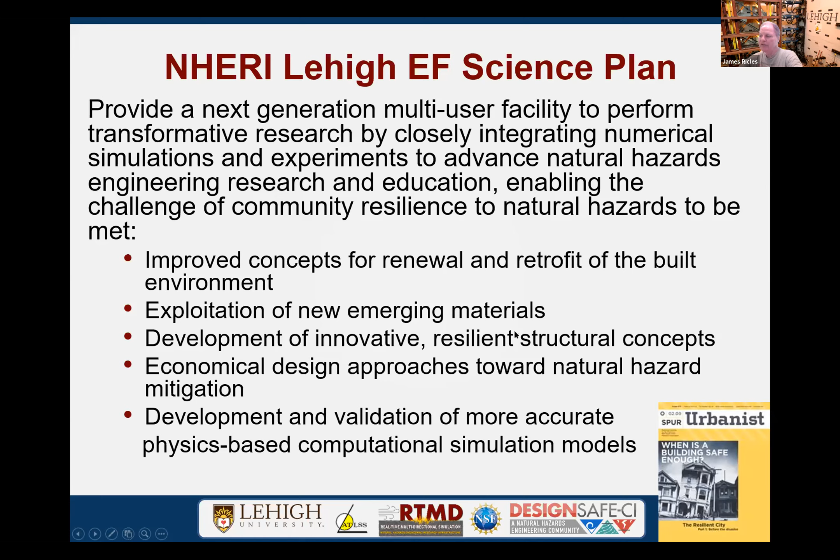This involves a couple of aspects: improved concepts for renewal and retrofit of the built environment, that is resiliency, exploitation of new emerging materials, the development of innovative, resilient structural concepts, economical design approaches towards natural hazard mitigation, and the development and validation of more accurate physics-based computational simulation models.

Our focus is on large-scale, multi-directional, real-time hybrid simulations. As you'll see later, that's not the only thing we do, but we'll elaborate on that. In this type of simulation, you combine physical and computer-based simulations. An experiment is actually a simulation, it's just a physical phenomenon, but we combine that with the computer-based approach for evaluating the performance of large-scale components and systems as a whole.

We want to be sure this doesn't appear overwhelming, because real-time hybrid simulation on paper looks not too difficult, but when you get into the details and theory, it could be a little overwhelming. What we do is provide user-friendly tools that enable you as a researcher to readily utilize advanced methodologies we've developed, using advanced testing technology and algorithms to perform complex experiments. We'll show some examples of that as we proceed through the presentation today.

So what we're able to do is enable researchers such as yourself to readily perform 3D real-time hybrid simulations, RTHS, of large, complex, nonlinear systems subjected to multi-natural hazards, for example wind and earthquake, using analytical substructures created with robust computational models.

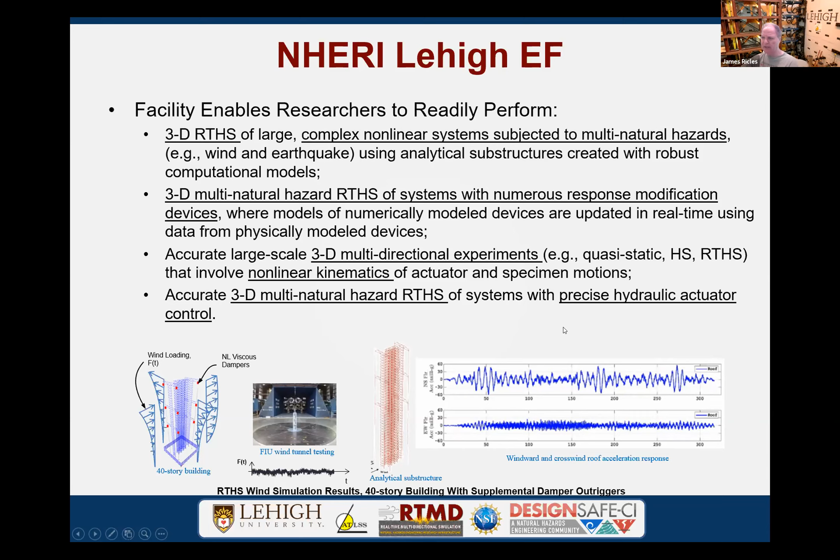Accurate large-scale 3D multi-directional experiments involve nonlinearities between actuator motion and specimen motion, which could occur in quasi-static hybrid simulation (HS) or real-time hybrid simulation (RTHS), both involving nonlinear kinematics with the actuator and specimen. In doing so, you need accurate actuator control. We have the ability to do that with some of the algorithms we've developed, enabling you as a researcher to utilize them in 3D simulations.

Some key questions in natural hazard mitigation. These are ones that have been posed by the National Science Foundation, the NHERI Science Plan. Some of these, which can be addressed through research performed at our facility, will lead to the development and implementation into practice of new natural hazard mitigation strategies and innovative resilient structural systems. In other words, the research you perform will transform and translate into practice. That's one of the ultimate goals.

In addition, enhance understanding of response to multi-natural hazards by accounting for soil structure interaction and fluid structure interaction effects. We actually look at considering both. Then the comprehension of system level effects on structural and non-structural components through large-scale 3D system experiments—not just one isolated component, but indeed the whole system in 3D.

Acquiring high-quality data, again, leads to improved computational models for predicting the response, not just of a system, but perhaps a lot of the infrastructure of the community to natural hazards. And what's very important there is training the next generation of workforce—the students who will become the leaders of tomorrow in natural hazards engineering.

What are some example projects? We have a number of them. These are just some that could be enabled. Some of these don't exist yet, but could be enabled at our facility.

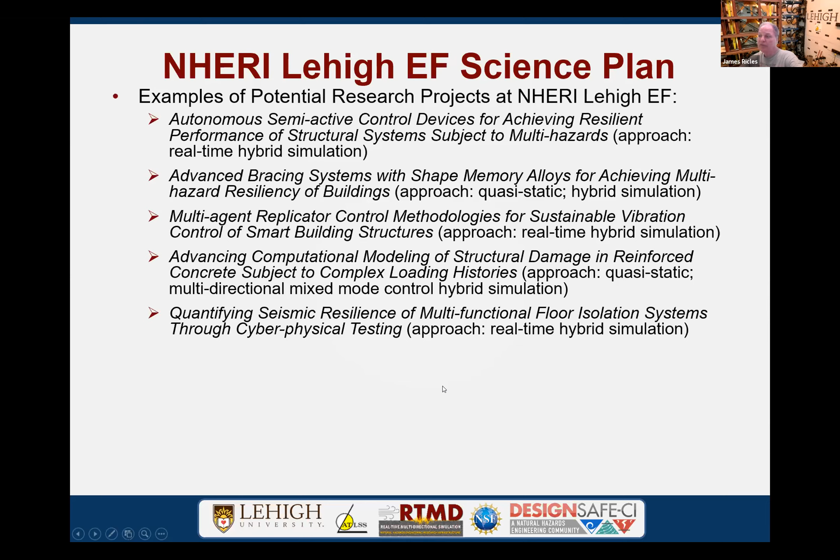Quantifying seismic resiliency of multi-functional floor isolation systems through cyber-physical testing, hybrid simulation—in this case real-time because it's probably rate dependent. And performance of non-structural components, very important as part of the issue of community resiliency.

These components are in systems, and we want to minimize the multi-hazard losses of these. And the effects of soil structure foundation interaction and multi-hazard forms of tall buildings, supplemental damper outrigger systems. The last one I have here is semi-active controlled cladding panels for multi-hazard resilient buildings.

In the parentheses, I didn't name each of the methods, but those are some perhaps conceived methods that could be pursued.

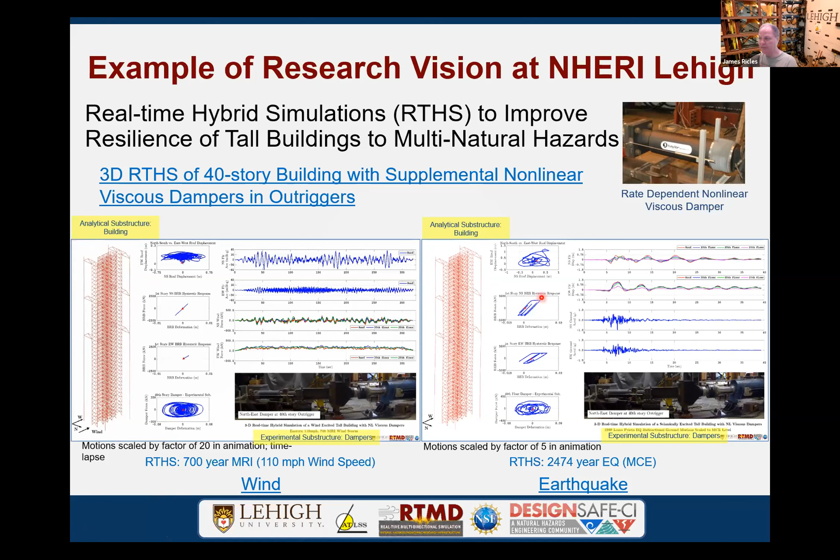When the system is subjected to wind, it's predominantly linear, but it has high acceleration, so dampers are placed in to minimize that. At the same time, on the right-hand side, when the earthquake occurs, there's actually nonlinear response in the braces that takes place. So this example with nonlinear response is accounted for.

Let me now describe the facility. We're a former NEES site—I think it originated around 2014. We've continued as a NHERI site. We were looking primarily at earthquakes, and now we address natural multiple hazards in general as a NHERI site.

We're unique in that we have a portfolio of equipment, instrumentation, and infrastructure, in addition to test beds with simulation protocols that enable us to do large-scale multi-directional testing. We could conduct concurrent multiple large-scale experiments, not just one, because of the size of the laboratory. We have an experienced staff that's very important.

Our facility exists within what's called the ATLSS Center. The ATLSS Center has been at Lehigh since 1987. It was sponsored by NSF. It continues to thrive, giving us additional resources and infrastructure to work within. Also, NHERI—our facility and ATLSS—complement each other.

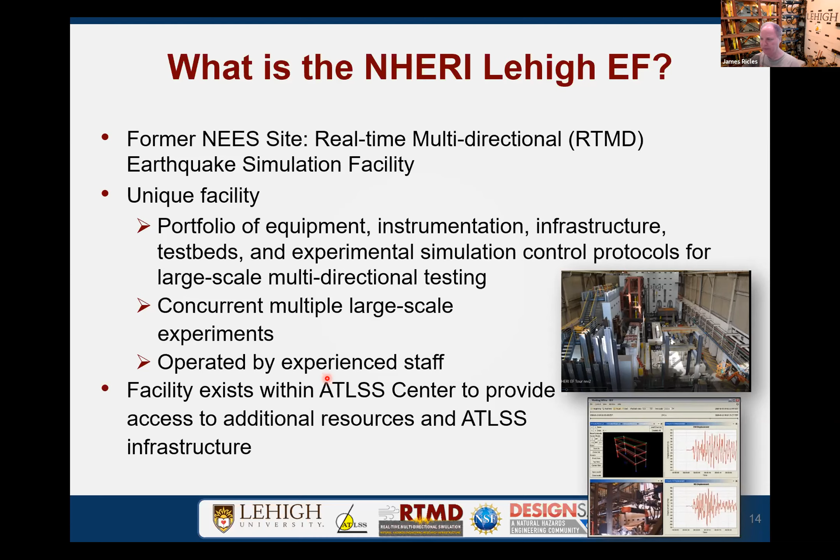What are our strengths? I mentioned this a few times: large-scale multi-directional testing, real-time loading. We have the actuators and hydraulic power to do so. We also have the ability to control those actuators, including adaptive compensation. That's very important in hybrid simulation because you can't really pre-tune things well, given that not only the actuators go nonlinear—the hydraulics—but also the specimen, and that could change your control parameters if you try to fix those otherwise.

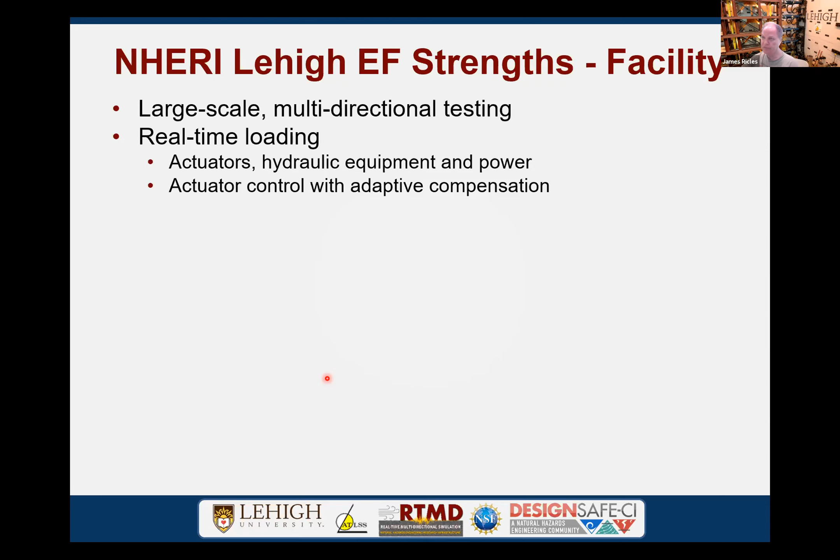We've built hybrid simulation from the ground up. We didn't borrow something and try to run it—basically that doesn't lend itself to what we'd like to accomplish. So we've implemented integration algorithms, formulated those initially, developed analytical models, multi-grid parallel processing type approaches, actuator control, multi-directional real-time actuator control in addition to kinematics, online model updating, and a data model for large-scale test data.

Our facility includes conventional instrumentation, but also advanced instrumentation such as digital image correlation and laser transducers, examples of which you'll see later. We also have a large inventory of ATLSS testing and auxiliary equipment beyond what we have for NHERI, which allows us to complement and have some contingency and redundancy.

Now, the people are very important. Our team includes expertise in several areas, including structural, earthquake, geotech, aeroelasticity, and wind engineering, as well as hydrodynamics, fluid structure interaction, probabilistic-based modeling, and structural monitoring and damage assessment.

We're pioneers in real-time hybrid simulation. We have a good know-how in large-scale experiments. On paper it's one thing, but to have done it successfully and have the experience that lends itself to helping researchers is very important. That's the know-how. We have a strong relationship with industry, practicing engineers, and familiarity with codes and standards. Myself, I'm a registered practicing professional engineer, so I'm very familiar with the practice and the field.

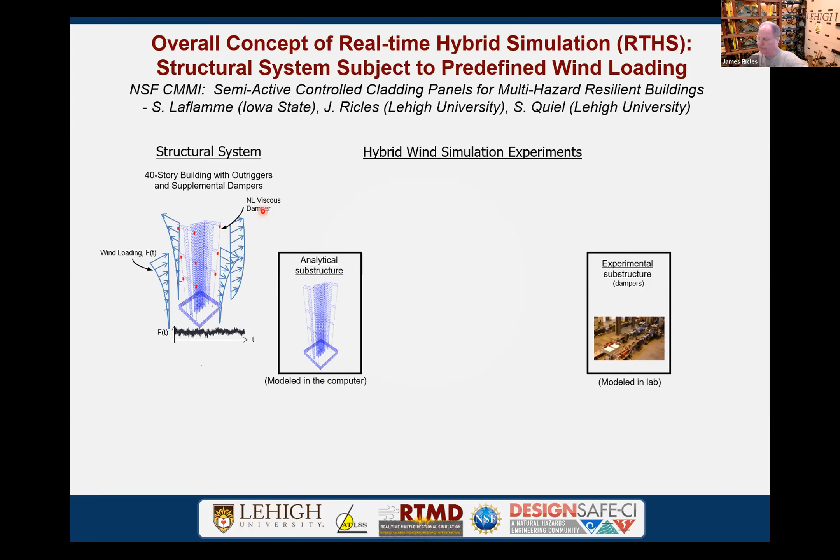You may argue there are simple, very easy models, nonlinear Maxwell models as an example. I would argue no, because these dampers perform differently under earthquake or wind, and being large scale, there are some issues you may be surprised about. So this is a simulation coordinator, it integrates the equations of motion. This is numerical integration, where the integration algorithm is very, very important. Leanne will discuss later - you have the inertia, proportional acceleration, velocity, which relates to the inherent damping.

R sub A is the restoring force from the left-hand side analytical substructure. R sub E is from the experimental substructure, the restoring force. That all balances the applied load.

At a particular point in time, we take the forcing function at that point and put it into the coordinator. The equations are then integrated to produce command displacements to both substructures, which are separated out as shown. What we ask in return is to have those come back.

This needs to be done in real time, for example in less than 0.002 seconds. We've actually done simulations where this takes place in less than 0.001 seconds, so 1 times 10 to the minus 3 as a time step. That all has to be completed within that time frame.

If you're able to do that, you then move to the next time step. If you can't, the experiment will go berserk because you'd be creating energy, which is literally impossible, but the system will try to do that and basically diverge and become unstable.

So if you go through that whole process and finish the experiment, you've got a real-time structural response. If you slow down the rate of testing, and that's fine as long as the right-hand side experimental substructure is not rate dependent, you'd have basically a more conventional hybrid simulation.

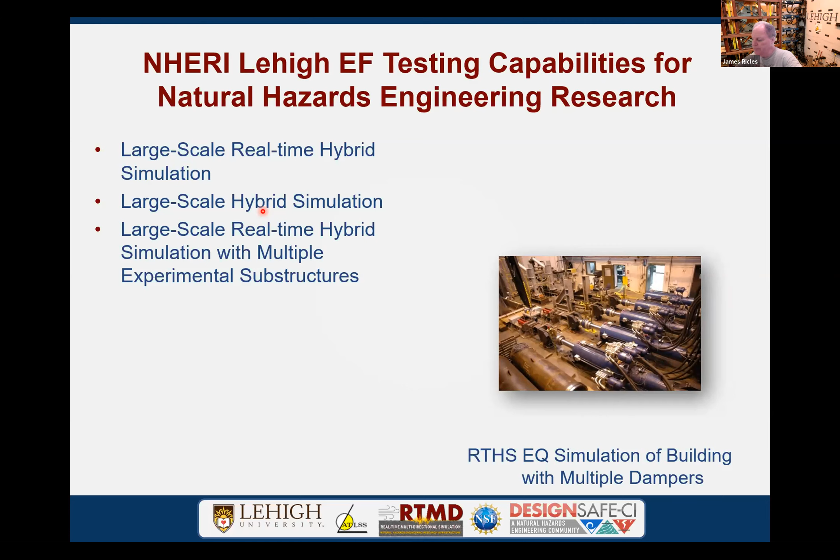We could also distribute the simulation. It's called geographically distributed. We've done this internationally as well as locally, for example with University of Illinois, RPI, was modeling soil in a centrifuge and Lehigh ourselves. The simulation coordinator in this case was at the National Supercomputer facility located at UIUC, University of Illinois, Urbana-Champaign.

We can also do this in real time. We've done so, and I'd like to acknowledge Dr. Kim and Dr. Richard Christenson at University of Connecticut, who we've interacted with and were able to do this.

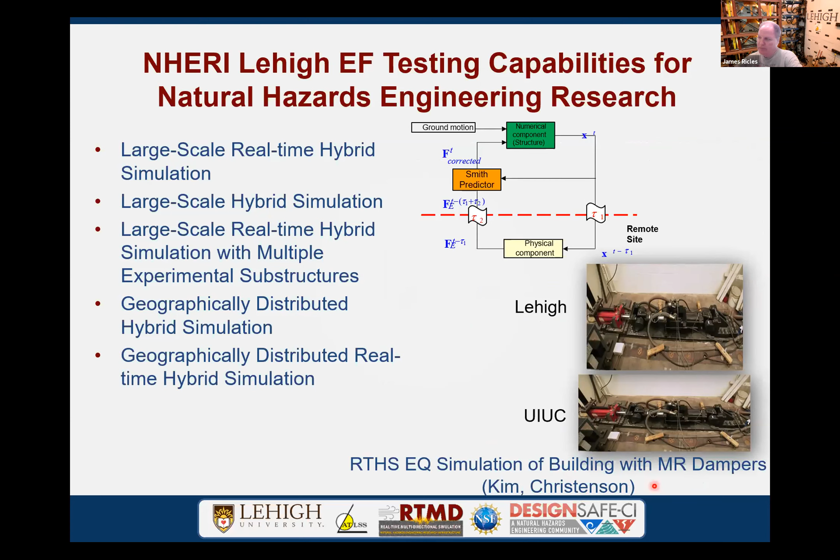Now, we do more than just hybrid simulation, real time or slowed down. We can look at predefined load or displacement. You may be very interested in looking just at quasi-static testing or just characterization.

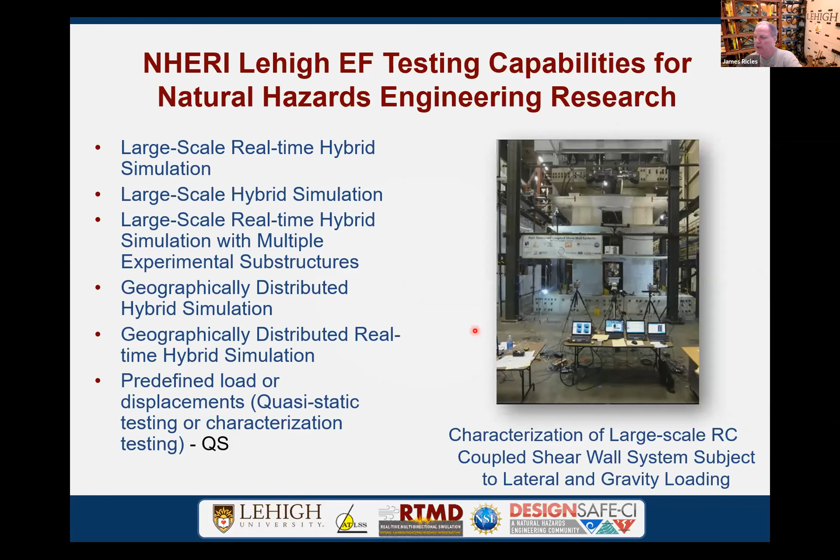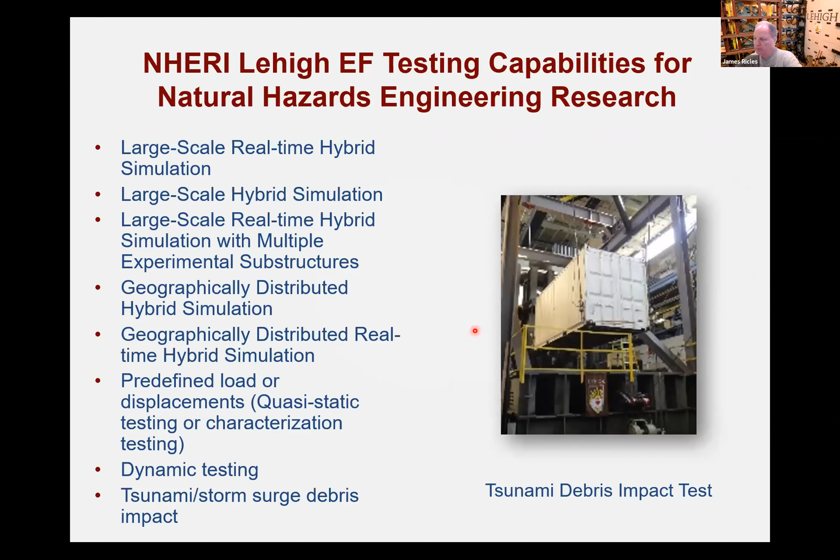The strong floor is 40 by 100 feet. This is in imperial units, so if you want to convert that into metric, you divide it by about 3 roughly.

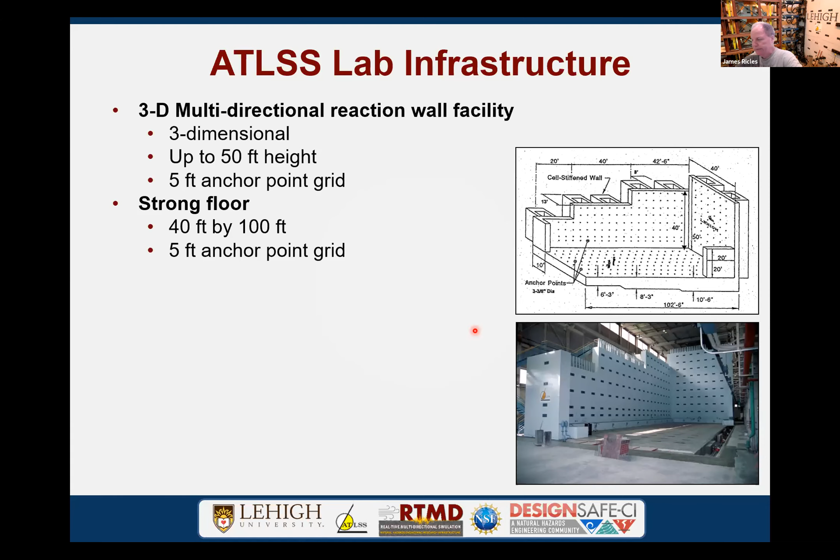We have a hydraulic supply system, additional over 30 hydraulic actuators, and supplementing what we have from our NHERI facility, additional digital controllers, acquisition systems, a large array of conventional sensors including those advanced sensors, and auxiliary equipment, an example being a 40 kip crane that we can use to lift things in place.

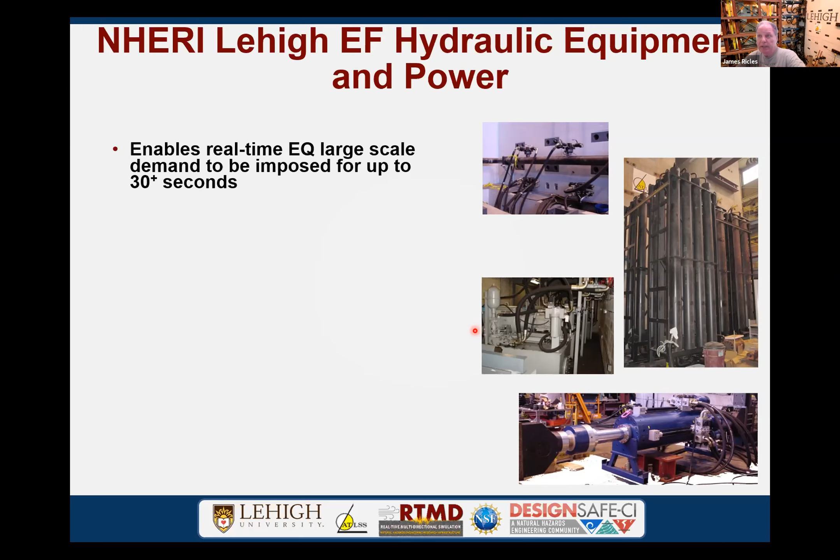Now, what complements that is our NHERI equipment. This was purchased from our sponsor to outfit our lab to do what we're showing you here. What's important at the heart of the matter is the hydraulic equipment and the power. We designed this back in 2002 to enable real-time, large-scale earthquake simulations, with demand imposed for up to 30 seconds or longer. This involves having a hydraulic supply system.

We have 5 120 GPM pumps, an accumulation system to augment that. We can basically supply over 4,000 GPMs, that's gallons per minute. We have 5 dynamic actuators. The capacities are in imperial units, 517 and 382 kips. Stroke plus or minus 20 inches. The maximum velocities are 45 inches a second and 33 inches a second.

This was all by design. This is achieved through high flow servo valves that we could rearrange on the actuators shown in the lower right. The blue cylinders are the actuators.

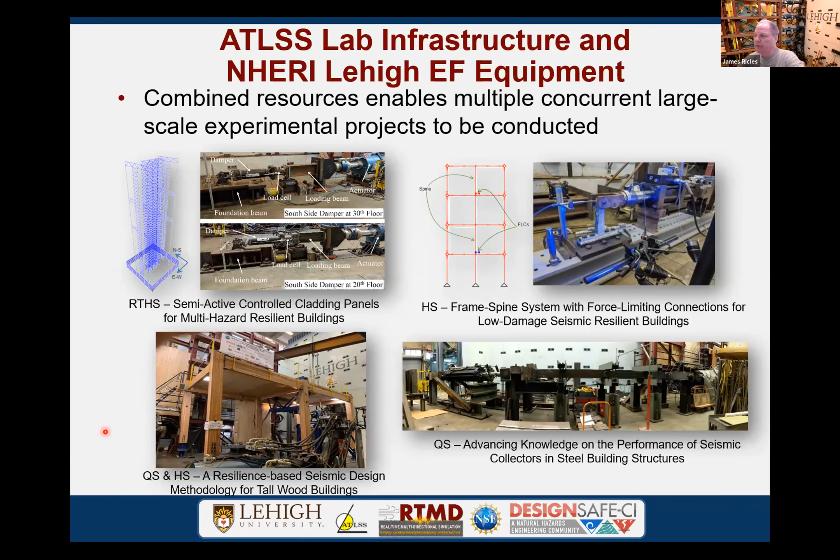Tommy will talk about our integrated control system on the IT side, but what I want to allude to here is it's a real-time system in which we configure the protocols I referred to earlier, shown here. I want to emphasize this: we can run the experiment in real time, or we can slow it down. We call it an expanded time scale.

So you don't want to feel like, well, I'm only going to go to Lehigh if I'm going to do a hybrid simulation in real time. No, if you want to do any type of testing at large scale involving imposed motions, it doesn't matter the rate of loading. It could even be a very, very slow test.

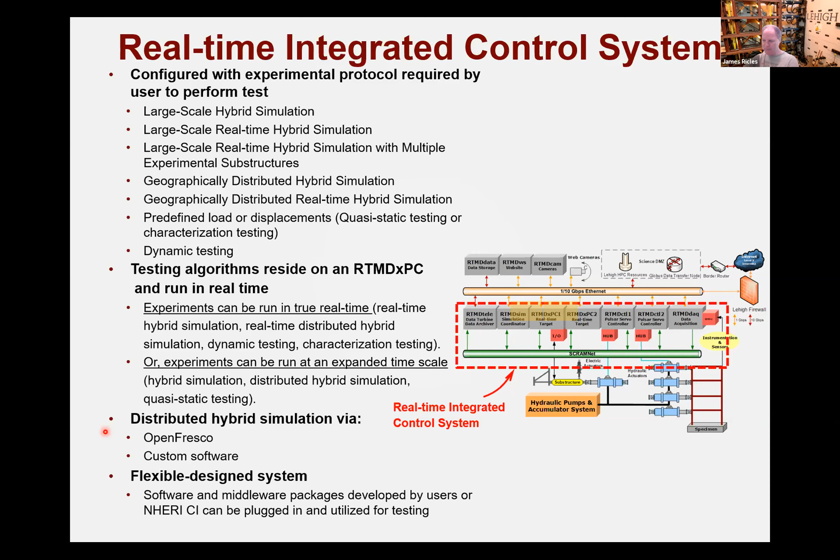We could accommodate you. We can also accommodate distributed hybrid simulation via custom software, or OpenFresco, which was developed at Berkeley. We use both of those pieces of software. We also have a very flexible system where we can use software middleware packages developed by the users or the NHERI cyber infrastructure, an entity in the NHERI community. They can be plugged in and utilized, but we want to be sure they work and have been validated before we integrate them into our system.

Some other resources that exist: we have a large preparation area for constructing specimens. There you can see a braced frame that was fabricated, about to be lifted into the test bed. We do mechanical testing for materials. We have an auditorium for education and community outreach activities. The preparation areas include staging and also a machine shop. The laboratory I showed there is mechanical.

We also have intelligent structures, for health monitoring, welding and joining materials, and microscopy. We have offices for visiting researchers, faculty and staff. And the meeting rooms I alluded to, but also conference rooms, and storage areas. This facility is definitely secure, so you can feel your things will be safe.

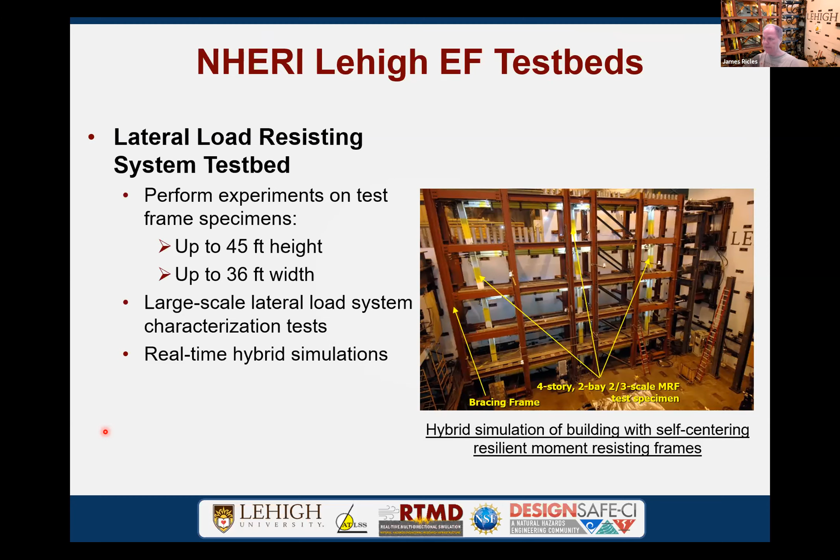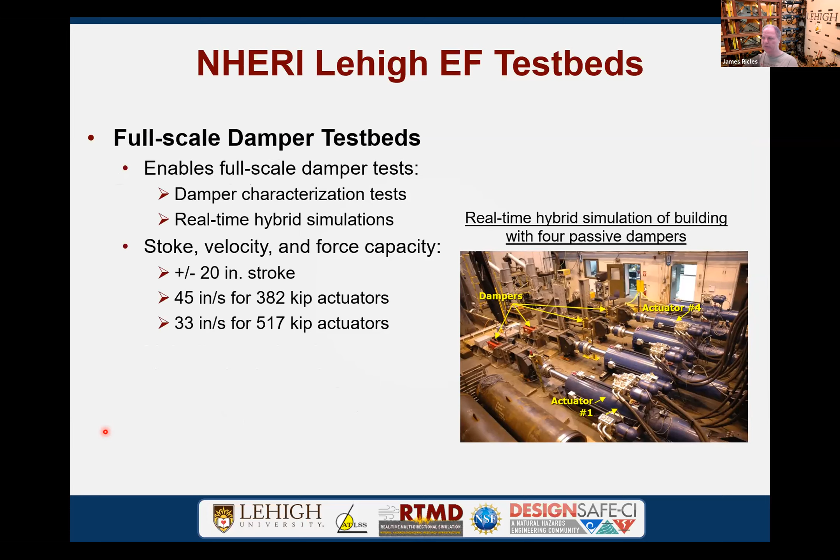The damper test bed, you saw a picture of this earlier. The capacity of those is really based on the actuators, which I'm just repeating here. We've used those test beds for characterization as well as real time. And I should note, these test beds could be reconfigured and positioned at different locations in the laboratory.

The tsunami and storm surge debris flume, I mentioned that. It basically consists of high-speed cameras and a high-speed data acquisition system, very high bandwidth resolution load cells to measure the impact force. And we have accelerometers and laser displacement transducers to achieve that.

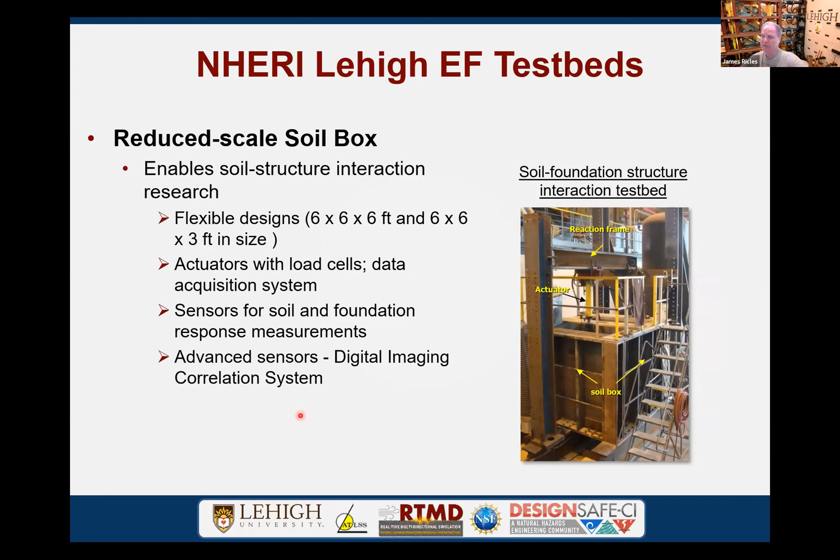The soil box is a reduced size scale soil box. It's very good for pilot tests, enabling one to look at the interaction between the structure and the soil. The dimensions are shown there. It's got advanced sensors as well as conventional sensors, including actuator load cells. The fact that we could also use this to do hybrid simulation or just conventional characterization tests is an attribute.

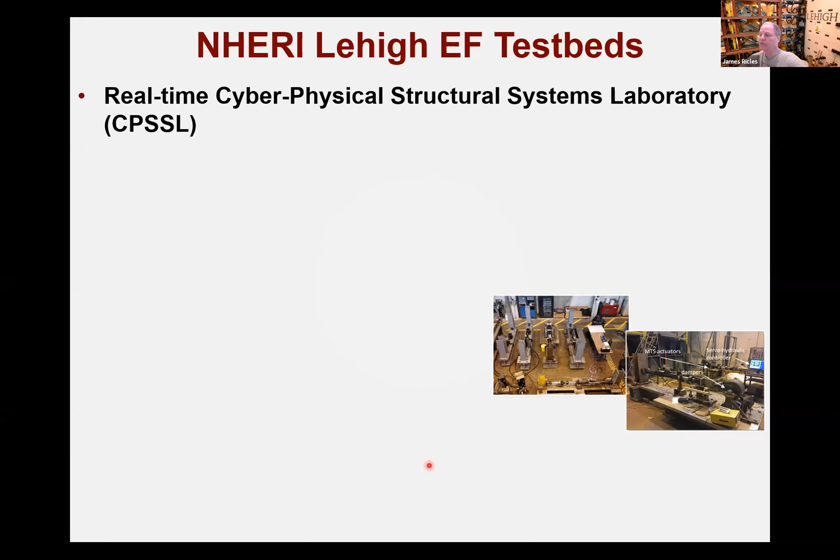It's a new resource, created to enhance our ability to conduct additional research, tie it with ECO activities, and training. Researchers get hands-on experience. If the other equipment is being used, which we're quite busy, we always make the time to make sure researchers have access to it, whether for training or for actual research. This gives us additional options.

You can get hands-on experience in cyber physical systems. That's sort of a new coined term for hybrid simulation. The goal is to broaden the knowledge, but primarily the user base. It's a smaller scale, lower cost with test beds, so if you're running a proposal, the budget doesn't need to be as large.

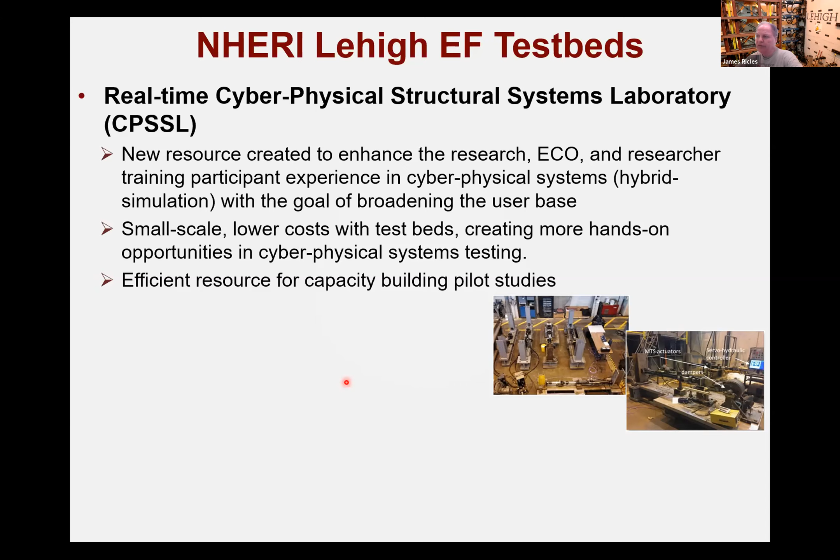And I mentioned this creates hands-on options. It's very good for creating pilot studies, for obtaining data from pilot studies, for even developing a proposal. We use it also for capacity building.

The system itself, before I state some of the equipment, is in terms of the integrated control systems identical to what we have in the laboratory with the big actuators. Nothing's different except here we just have a different set of actuators. The particular actuators have their model numbers listed there - I think our guests from MTS would recognize what those are. I'm just going to list these down here.

We designed those in order to get long strokes, such as looking at hybrid simulation with shake tables, so we have very long stroke actuators, in some cases plus or minus 10, versus some shorter stroke actuators which have greater capacity but also very high velocity. So this is envisioned to look at maybe some different ranges of demand.

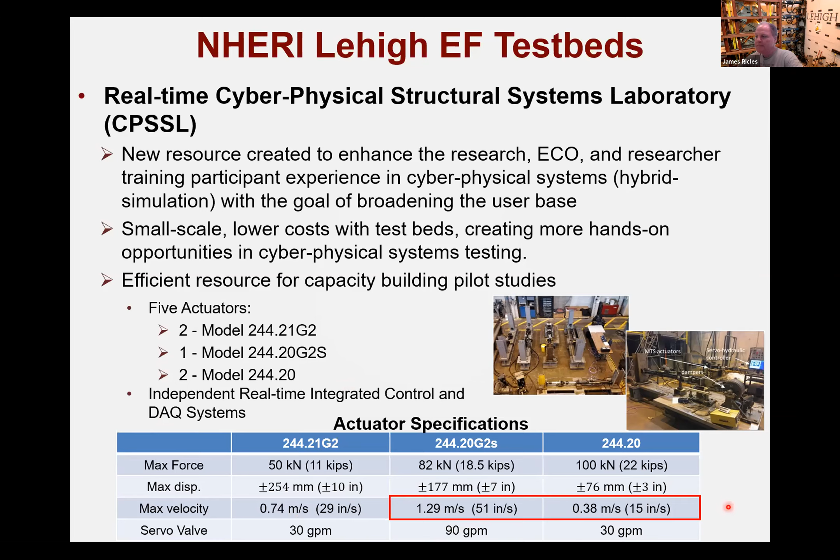So with that, we'll have a Q&A after I finish this next session. This will be on some of the example research projects. There's a long list here - this is archived, so I'm not going to go through and read every one of these, but rather I'll select a few. We have the researcher, the institution.

Sometimes we collaborate with other institutions, primarily because they like us to help out with maybe some of the hybrid simulation, but typically those are led by other researchers such as Shiling Pei. This is the title of the project, and in parentheses is the methodology. I'll let you study this on your own if you wish. The most recent project is by Scott Harvey, who was here 2 weeks ago, and in that one week we did 240 hybrid simulations on a base isolation system.

The first project is directed by Simon LaFlamme, Iowa State. It's looking at semi-active controlled panel cladding - these are connections to improve the performance of the system. Basically, the hazards include earthquake and wind. It involves different facilities - ourselves, NHERI UF and FIU, the University of Florida and Florida International University, their wind tunnel facilities. This involves cladding connections and control laws.

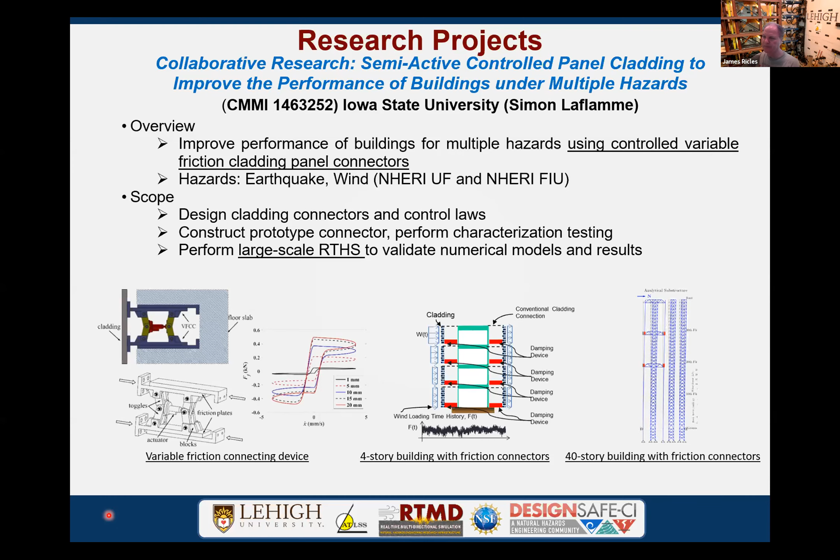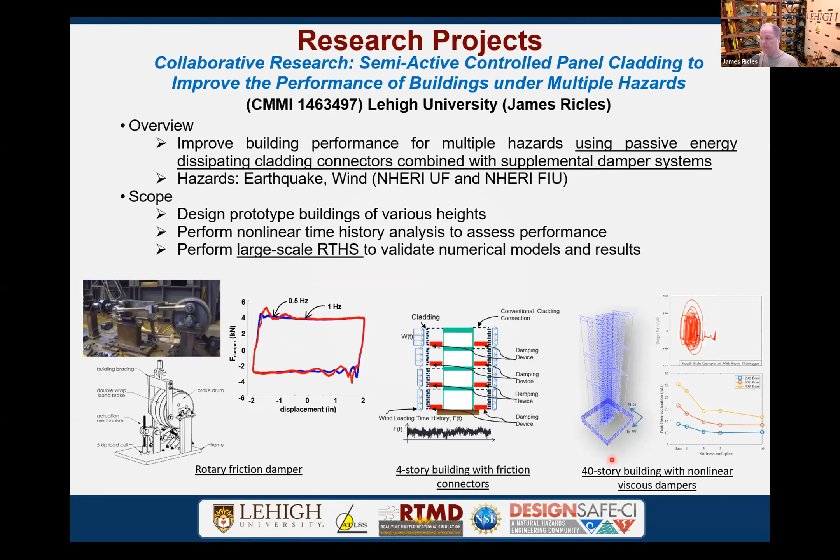What complements that project is where we looked at passive energy dissipating cladding connections combined with supplemental damping systems. For example, there's a friction damper, a new generation rotary friction device. Liang Cao has been leading this effort. We also have nonlinear viscous dampers, the latter being in tall structures. Wind tunnel testing was involved for the wind aspects.

Some of the findings: particularly the outrigger systems with nonlinear viscous dampers show significant improvement. It's relative to what you consider significant, but this is a relative improvement comparing with and without the damper systems.

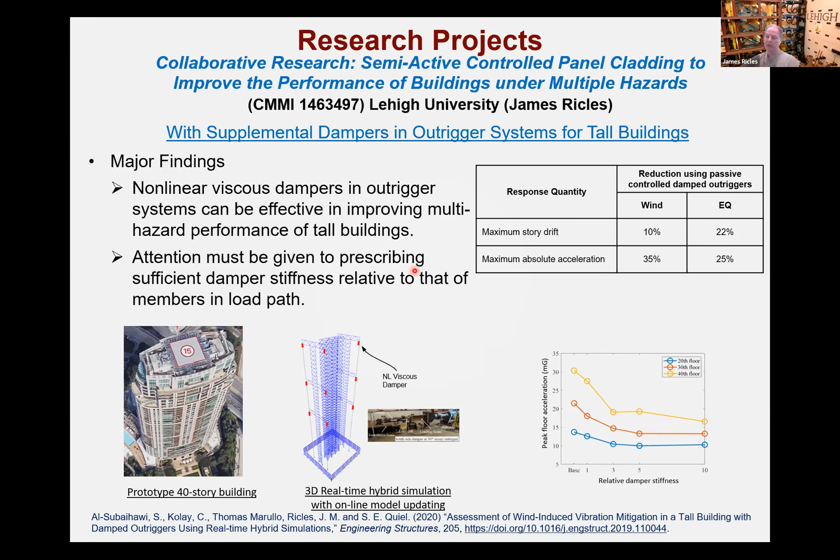The other thing that's very important, I've seen this written up many times, but we discovered this a while back and it's reinforced here: the load path the dampers reside in is very important. You want to make sure the dampers' relative stiffness is sufficient so that deformations occur in the dampers and not in the members otherwise in that load path in series. Otherwise, the dampers are not effective.

Colorado School of Mines, we looked at resilient systems made out of timber, cross-laminated timber. This is led by Shiling Pei at Colorado School of Mines. It involved rocking systems - post-tensioned, self-centering cross-laminated timber walls, CLT, SC stands for self-centering.

Particular studies done at Lehigh were to construct those walls and the floor system, the collector system, and the gravity load system, and subject that to bidirectional loading. This was quasi-static in order to look at details that have never really been developed or validated - the actual details of the connections, the gravity connections, the collector connections, and the performance of the walls.

This is a new concept here, involving large-scale testing. It actually had 3D motions because things were done in bidirectional prescribed motion, but vertical motion occurred because the members, when displaced laterally, also tended to move downwards due to the kinematics.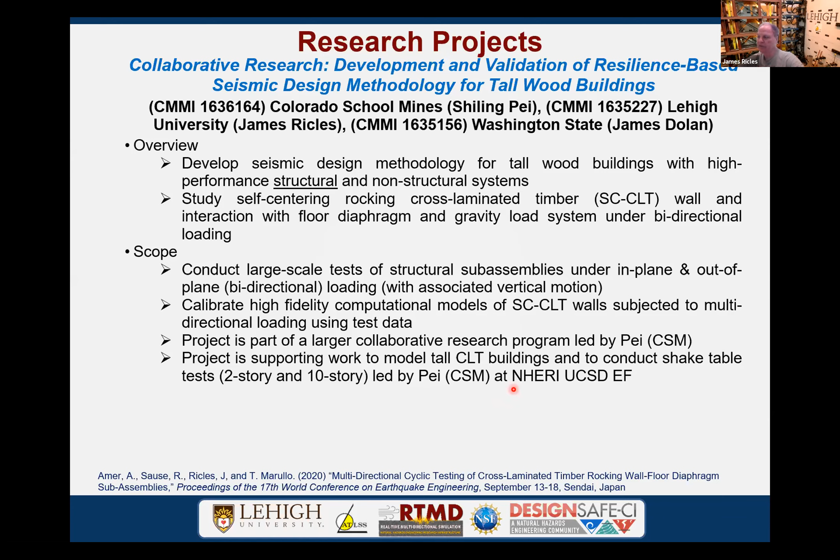This enables us to develop high-fidelity computational models with our collaborators. Again led by Shiling Pei, this is a larger collaborative project leading to a large-scale shake table test at UCSD in September, I think it's 2021. It'll be a 10-story structure. The 2-story structure has already been completed.

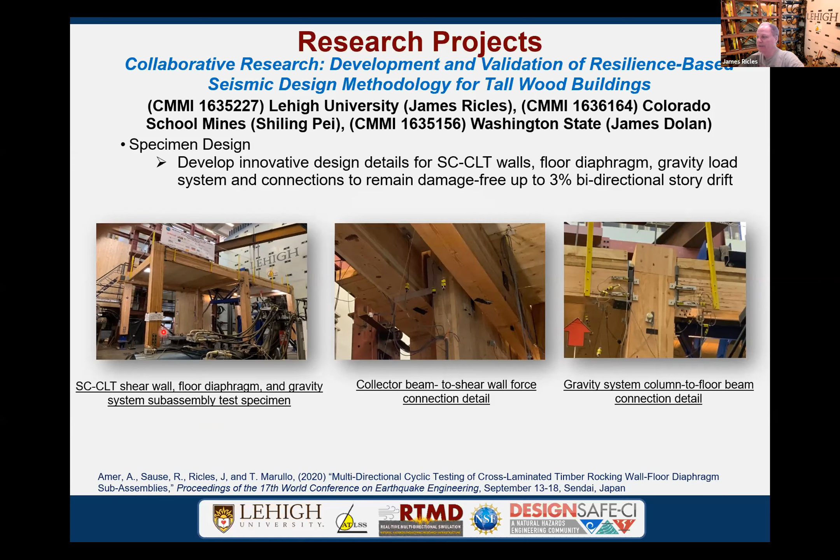This shows a video split screen where the red and blue in the lower left show measured versus targeted motion. We're able to achieve very precise motion control, and you want to move the specimen to exactly where you want it to be so you can get the data you need.

This is at the base of these 2 coupled shear walls shown here, and this is a hysteresis. In plane, you expect more lateral force versus drift compared to out of plane - it's not intended to be out of plane. Notice they primarily self-center.

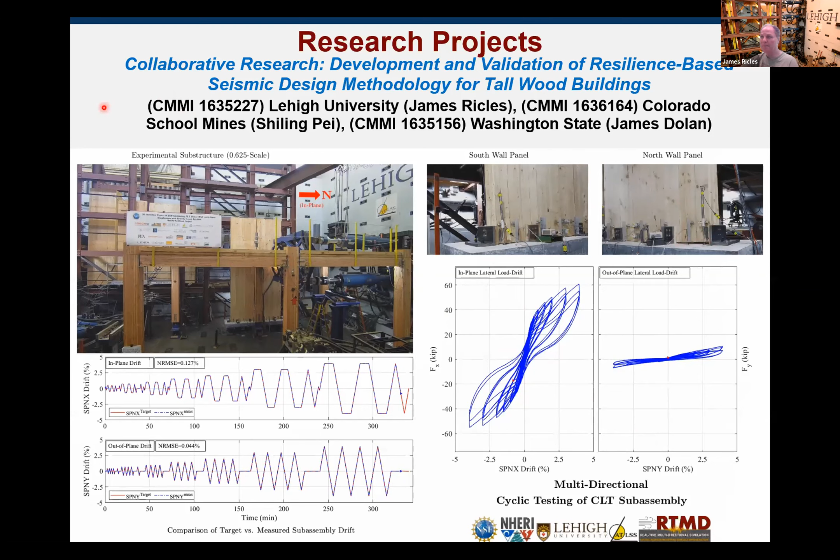There's a little bit of residual. That's because of the wood here developing some damage, which we've improved by reinforcing it.

Keri Ryan at University of Nevada, Reno has been doing testing looking at the non-structural. The structural part we can make resilient, so the weak link in the chain of resilience becomes the non-structural.

She's been looking at, for instance, partition walls. Here are some partition details. These are subjected to bidirectional loading by placing them in our setup and subjecting them to the loading to see if these components will remain resilient, but also how much they contribute to the structural response. They're not just going for the ride.

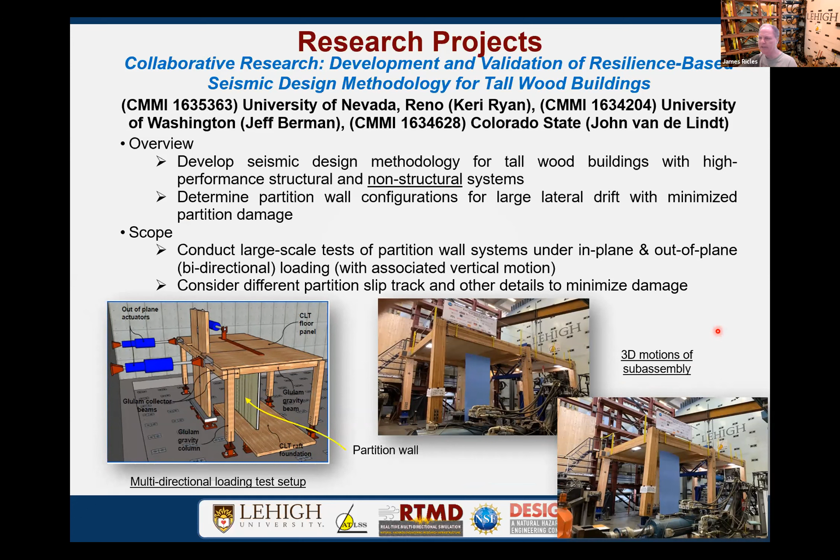Larry Fahnestock has been working on a project involving research in Japan, where a lot of structures have soft stories. This is just showing a 4-story structure with the weak story. To overcome that, the structure's already been designed to provide a spine, called a spine system.

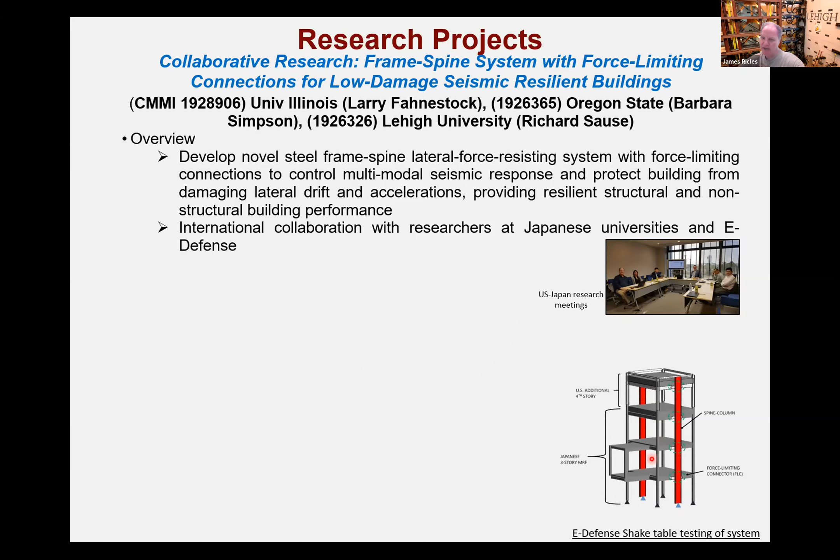If you put a spine system in a structure, you're going to alleviate the soft story effect, but the higher modes can still contribute and generate high acceleration. So to overcome that, force limiting connections are placed between the spine system and, in this case, a structural system, such that you're able to alleviate the high accelerations and also the soft story.

The work being done at Lehigh is to develop these connection details to promote resiliency, develop a design procedure, and perform hybrid simulations. In this case, it doesn't have to be in real time, to assess the performance and design procedure, as well as the performance of the connection shown here. There's a DIC system measuring deformations, and we're conducting numerical studies as well. That will be followed up in December with full-scale shake table testing at E-Defense.

You may have received an announcement from E-Defense about a blind prediction contest associated with this project. Here is a split screen video showing the structure. The spine is not exactly shown, but it's along the cursor here.

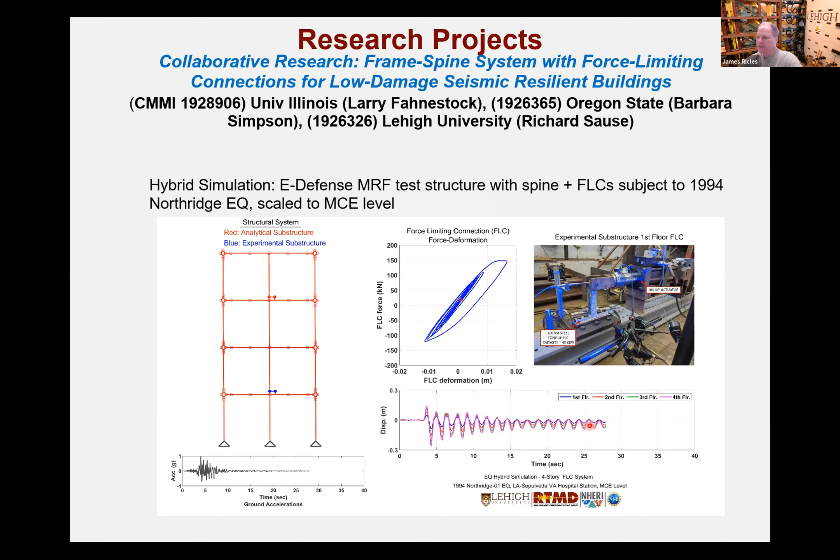This is the force deformation response of the connector down here. This is not moving because it's a still picture; we didn't take a video at that time. This is the displacement through the 4 stories. Essentially, the system had a very small amount of residual drift, which otherwise you'll see in a minute.

This is a system with the spine, from the numerical simulations. This numerical simulation is without the spine, with the spine, and the hybrid simulation. Without the spine, we get the soft story here. With the spine, that's alleviated.

Plotting the story drift time histories of all 4 stories, you see the MRF shown here. You're getting residual drift. This is detrimental - the building's going to be basically demolished, even though it didn't collapse.

This particular level of earthquake loading was actually the max considered earthquake, so it may be more demanding, but it shows the spine system works well.

Here's that response, the accelerations, the accelerogram from the earthquake shown here. You can see the reduction when you compare the numbers in the last column here. The MRF alone has smaller accelerations, but it has a soft story, which is bad. Adding a spine, you're able to reduce the drift and also not increase accelerations too much.

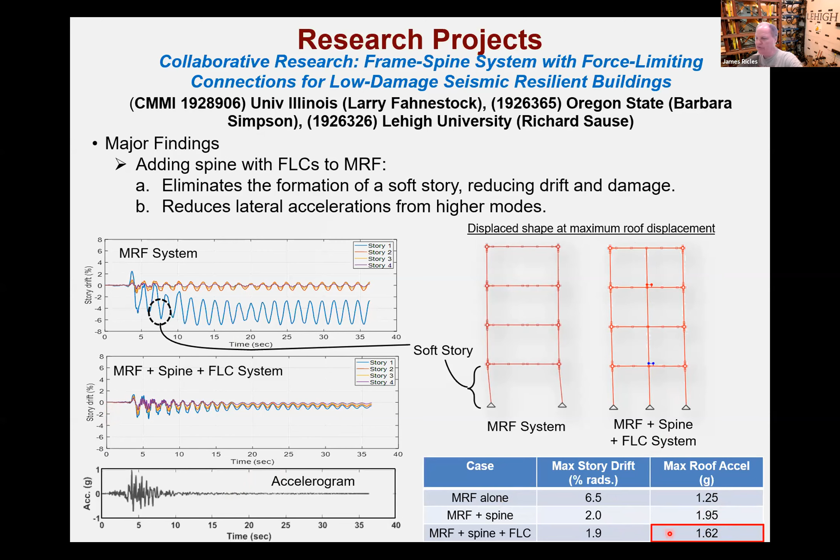Lastly, this is one of the latest tests ongoing in the laboratory: the seismic resiliency of equipment, basically multifunctional floor isolation systems using hybrid simulation, or cyber physical testing, led by Scott Harvey at OU.

We're up and running, fully operational, so he was able to come and do these tests almost 3 weeks ago. He was here for about a month doing testing, so his testing actually finished 2 weeks ago. He came here at the beginning of August.

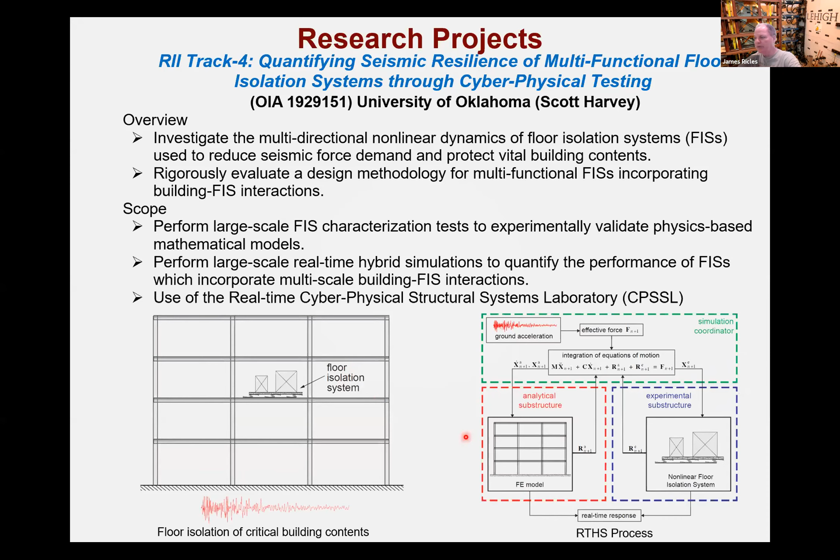During this test, both Scott and the student were here, and this is our control room. At the time, we had to be very careful about following CDC protocols. We have social distancing, but otherwise we're able to operate.

These were the bearing characterization and the hybrid simulations, and these are some results here. Okay, well, thank you very much.

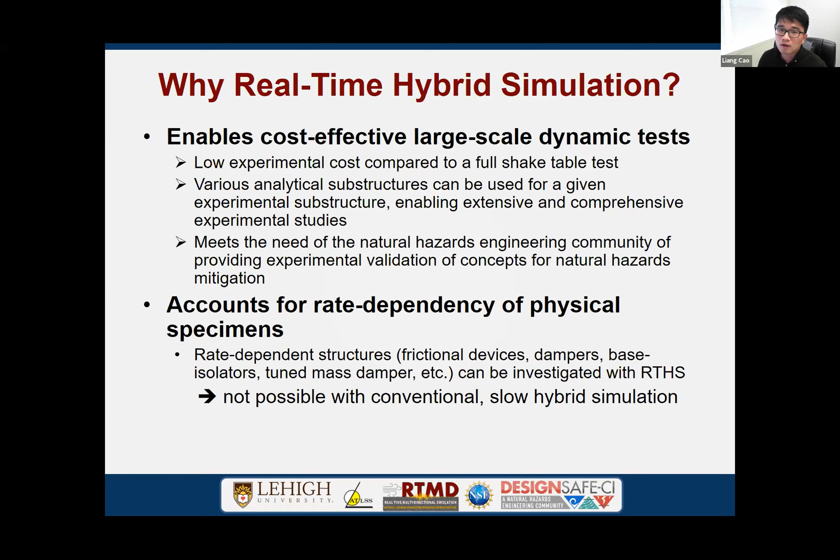So the overall concept of real-time hybrid simulation is pretty easy and straightforward. However, if you want to do the implementation, you've got to face some issues and challenges.

The first issue is in the simulation coordinator, especially the numerical integration algorithm. We want the numerical integration algorithm to be accurate, because every dynamic test or analysis is an approximate analysis. We want to minimize the errors to give realistic and more correct answers.

Second, we prefer to have an explicit numerical integration scheme. Basically, integration schemes can be classified as implicit and explicit. The explicit scheme means the structural response in the next step only depends on functions of the current step and the previous step.

The benefit is it can avoid the iterations during each time step. Sometimes if it's not converged in each time step, you can't even do a hybrid simulation.

If you use explicit schemes, we want this scheme to be unconditionally stable. For example, if you want to do complex analytical substructures with highly nonlinear behavior, some high frequencies could destabilize the system if your integration scheme is only conditionally stable. A lot of explicit schemes are actually conditionally stable.

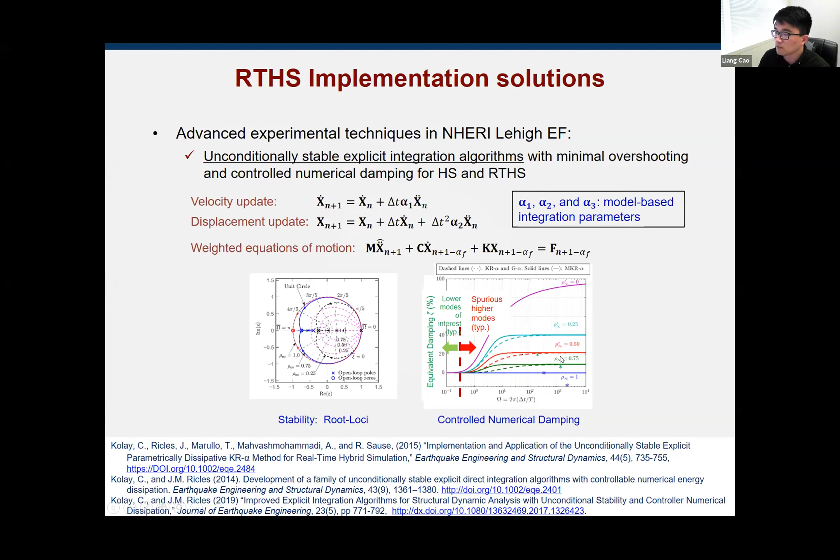So basically this rho infinity is the only parameter you need to define before the simulation. All the alpha 1, 2, 3 parameters are predefined based on rho infinity, and the rho infinity value ranges from 0 to 1.

Second one is for the finite element modeling of analytical substructures. We developed a new explicit force-based nonlinear fiber element. Typically we use a fiber element for finite element modeling on any numerical structures, and it can be categorized as displacement-based fiber elements or force-based fiber elements.

The benefit of displacement-based fiber elements is that state determination is straightforward. However, because they rely on shape functions, the curvature varies linearly, which means if you want to model nonlinear behaviors, it requires numerous elements per structure member, significantly increasing the degrees of freedom. If you want to model a high-rise building or more complex structures, this places a large burden on computers, and sometimes you can't even achieve hybrid simulation or real-time simulations.

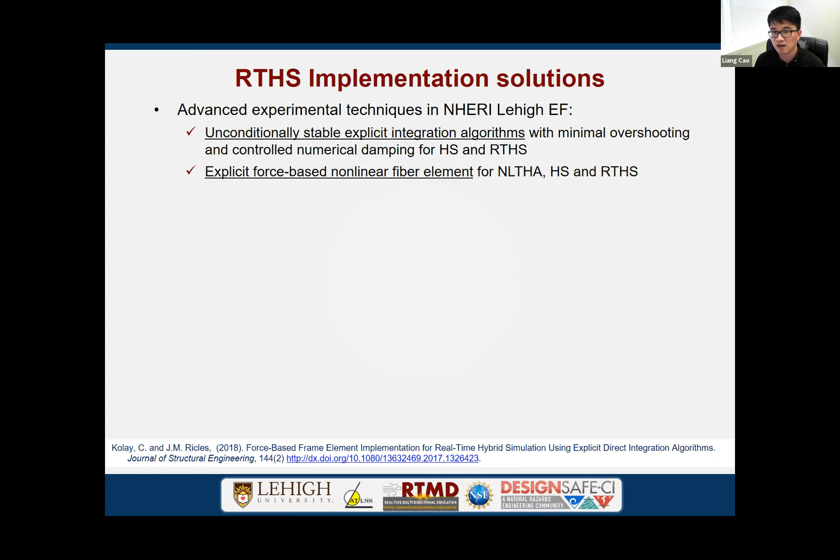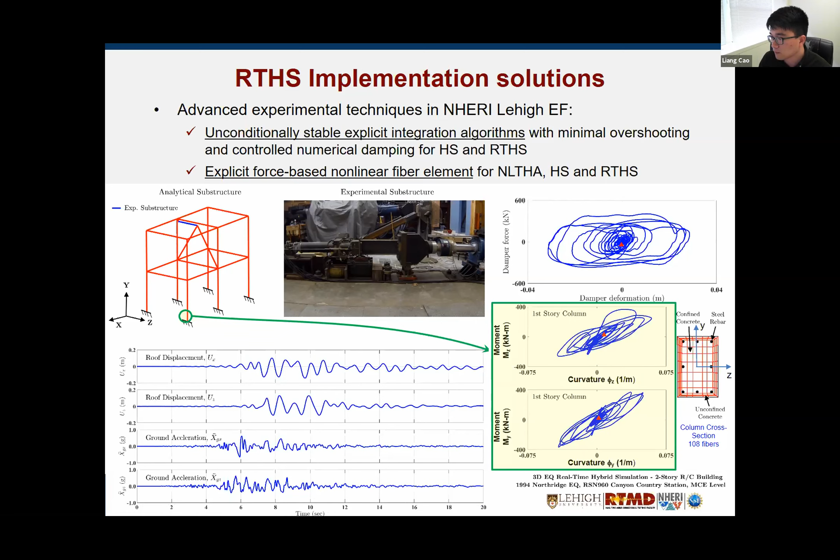The third great achievement is we developed methodologies to do real-time nonlinear model updating for real-time hybrid simulations or even hybrid simulations. What that means is, for example, in our last testing, we're doing a two-story building with one physical damper installed.

If we want to test a more complex or high-rise structure, we may need more than one damper or physical element, possibly a dozen elements. However, due to lab space limitations, sometimes you can't fabricate all the physical elements in your lab. So what we can do is numerically model part of the physical elements in the analytical substructure, and do real-time model updating based on the existing experimental elements. This basically means the dynamic behavior keeps updating in real time using the experimental restoring force feedback. I'll explain this through an example later.

The fourth great achievement Lehigh developed is 3D kinematic compensation actuator control algorithms. This means that sometimes if you have a really large-scale experimental substructure, for example in this CLT project, we have 4 actuators controlling the CLT panel. However, your control node is actually on the panel, not on the actuator connections, which means whatever command displacement you give to the experimental substructure is actually for the panel, while the control is on the control node, not the actuators themselves.

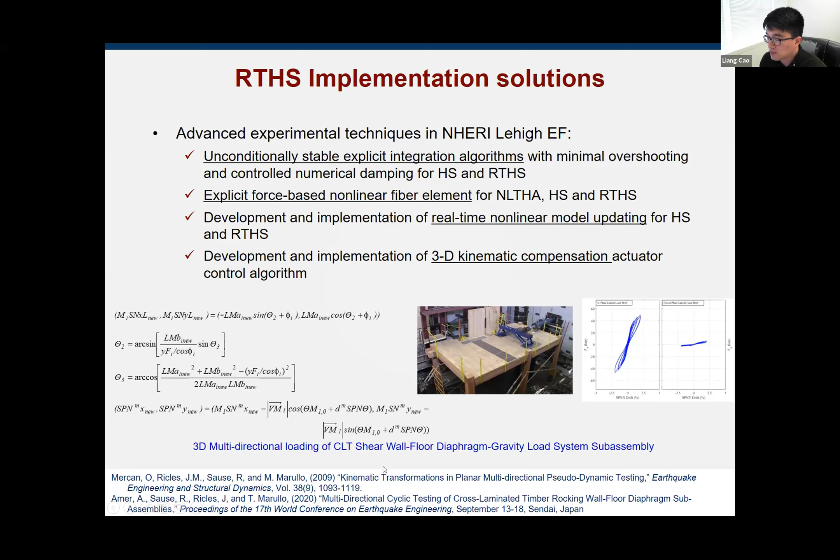You can find these kinematic compensations in these 2 publications.

The 5th one is we developed a real-time adaptive servo hydraulic control. This is used for the actuator delay compensations. Basically, what that means is sometimes you always have an amplitude error and delays. This is coming from maybe the nonlinear servo hydraulic dynamics, maybe from the actual fluid dynamics. Sometimes the test specimen material and geometry nonlinearities can give you amplitude error, and the hydraulic can give you the delay. So we try to address this, since delay and amplitude error can create instabilities for your real-time hybrid simulations.

That's why we developed our own real-time adaptive actuator control. This formula basically explains the controller. The X, so this U is a compensated input displacement to the actuators, and the X is the targeted displacement.

Basically, it follows the Taylor series, and we have 3 parameters: A0, A1, and A2, and these parameters are adaptive, meaning there's no user-defined values. These parameters can be automatically adapted based on minimizing delay errors using least square functions. There's some physical meaning between each parameter. The first parameter actually represents the amplitude error. The ratio between the first and second one represents the time delay.

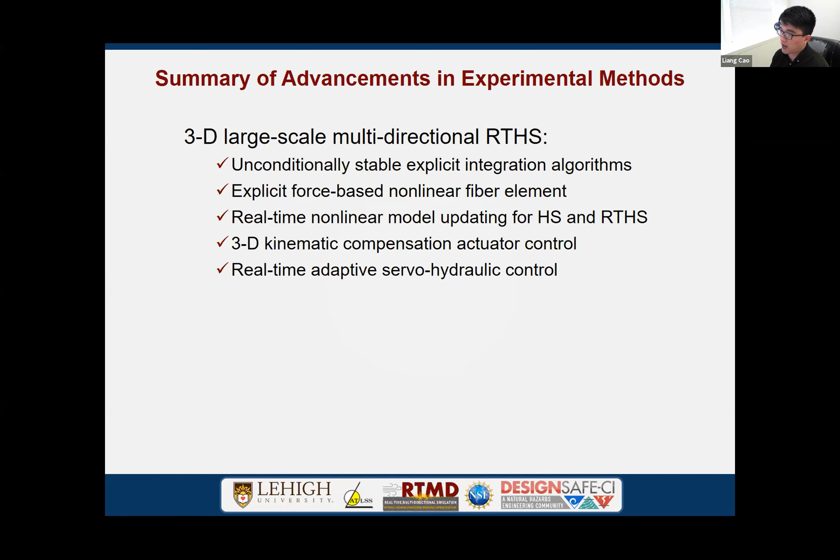Now I'll introduce examples to explain how we use these to do real-time hybrid simulations. This example is a multi-hazard real-time hybrid simulation on tall buildings. Basically, it's a 40-story BRB frame building. We assume it is located in Los Angeles, and it is designed per the PEER report.

It has BRB frames in the north-south direction and east-west direction. In the north-south direction, the BRB frames are installed in the middle bay. In the east-west direction, there are 3 BRB frames installed in 3 bays. So the north-south direction is the weak direction. The building also has 2 outrigger columns connected with BRB frames, only connected at the 20th, 30th, and 40th stories. The objective for this study is to try replacing the outrigger columns with a nonlinear viscous damper to improve its multi-hazard mitigation performance.

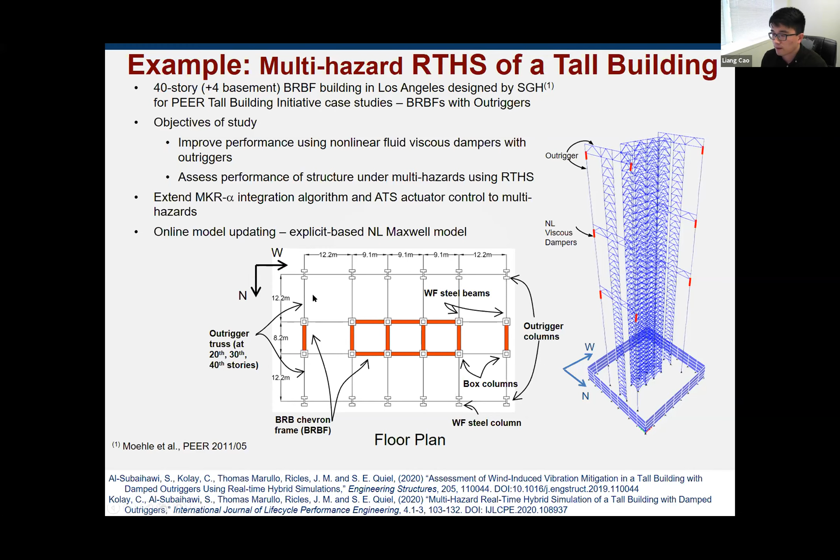To do this real-time hybrid simulation, we're using the MKR-alpha integration scheme and the ATS actuator model control, and also online model updating for the nonlinear viscous dampers. I'm going to explain how we do that on the next slides.

For the multi-hazard excitations, we consider earthquake and wind. For the earthquake, a bidirectional earthquake is used - it's the MCE level 1989 Loma Prieta earthquake. For the wind load, we're using bidirectional wind loads observed from wind tunnel tests. The design wind speed is 110 miles per hour. The wind load is actually from aerodynamic wind testing at the NHERI FIU facilities.

In their lab, we built our 40-story building as a rigid model, and we measured wind pressures on each wall section and calculated wind force, the time history wind force. Note that the rigid model in their facility is at 1/150th scale, a small scale model. When calculating wind force to achieve full scale, we have to scale back the time history wind load. So right now for our hybrid simulation, we are doing full scale hybrid simulations.

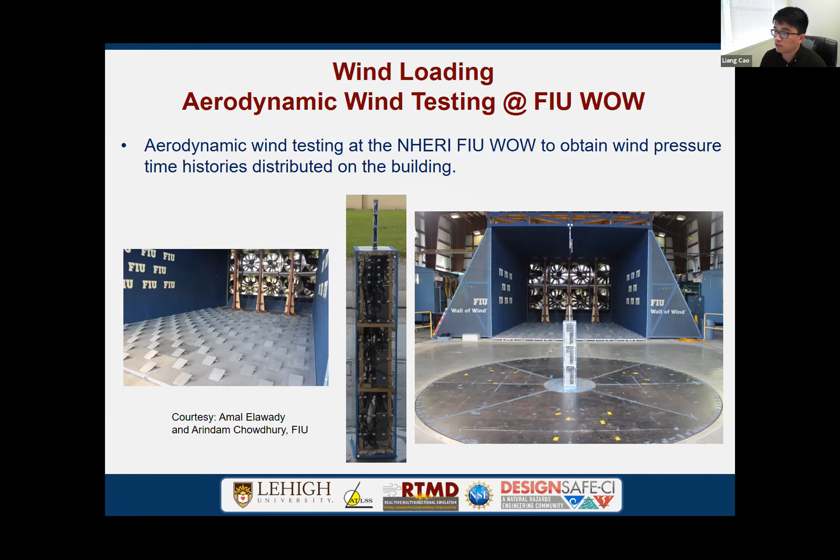For the ATS actuator control, since under wind load the structure's behavior is pretty first-mode dominant, we fix the A0 and A2 values. A0 represents the amplitude errors, which you can easily estimate from the actuator itself based on measurements, so we fixed these values. But for the earthquake, because you don't know whether your structure may have some nonlinear high frequency behavior, we leave all these parameters adaptive.

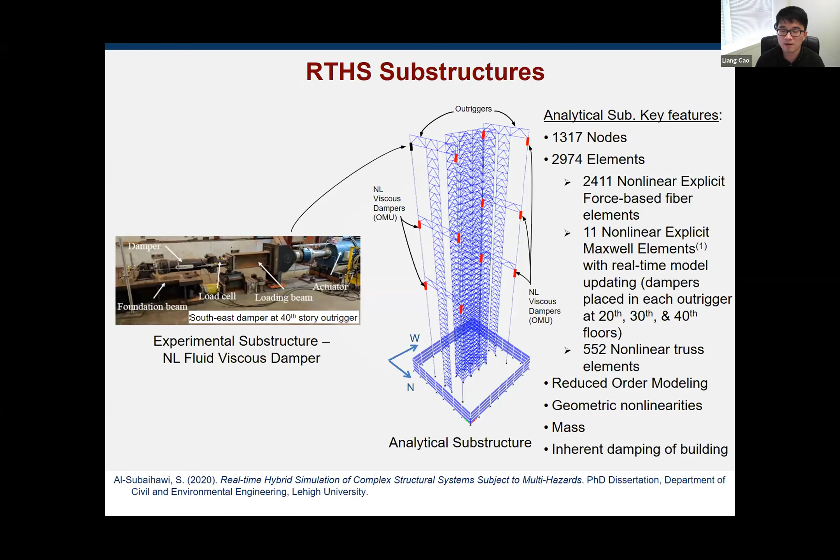All other 11 dampers are numerically modeled using the nonlinear explicit Maxwell element we developed, and those parameters will be updated through real-time model updating in the hybrid simulations. So here's the procedure: we only use one physical damper in the 40-story southeast corner, and we keep all other 11 dampers as numerical dampers.

When we do real-time model updating, we use an unscented Kalman filter tool to update the model parameters. To model these dampers, we use the explicit non-iterative nonlinear Maxwell damper model, because everything has to be explicit. And of course, for the Kalman filter, we have methodologies to tune the filter parameters.

Here's the difference in the overall concept. Typically in real-time simulations, you just feed back the experimental substructure's restoring force to the simulation coordinator, along with the restoring force from the analytical substructures, to calculate the real-time structural response.

However, because we have 11 numerical dampers, those need to be updated in real time. So what we do is use the command displacement from the experimental substructure, along with the measured restoring force, as input to the unscented Kalman filter, and then update the model parameters in the nonlinear damper models. We use the analytical command displacement for the numerical damper positions to calculate the restoring force.

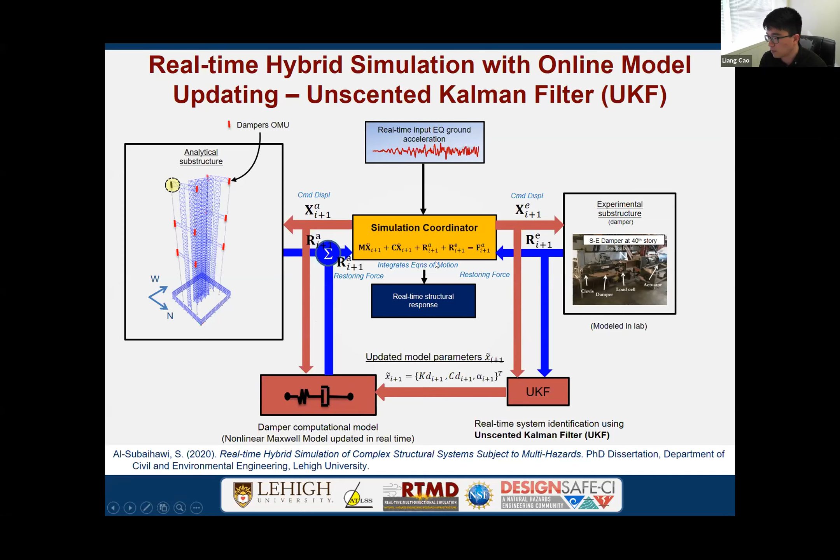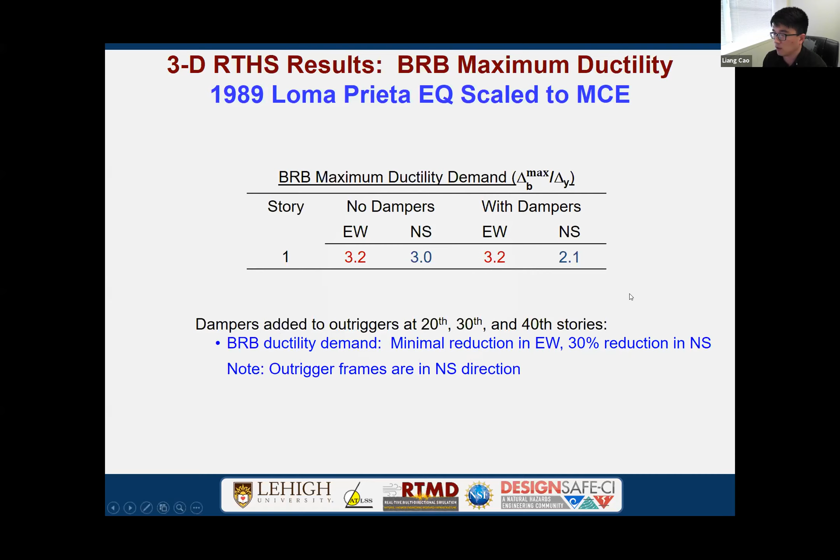Here's some key findings. Under the earthquake load, we're interested to look at the BRB maximum ductilities. After we install the 12 nonlinear viscous dampers, we can have a maximum 30% reduction in the north-south direction BRB frame, because the damper is only installed in north-south directions.

So we don't have that much reduction in the east-west directions, but it's a pretty good achievement because we're only using 12 nonlinear viscous dampers in the 40-story building. For the wind load, we are more focused on the roof accelerations because it affects the comfort of the people who live in these buildings. We found that after installing the nonlinear viscous damper, we are able to reduce peak accelerations by 35% in the north-south direction, and even have a 10% reduction in east-west direction accelerations. For RMS accelerations, we have close to a 50% reduction in the north-south direction.

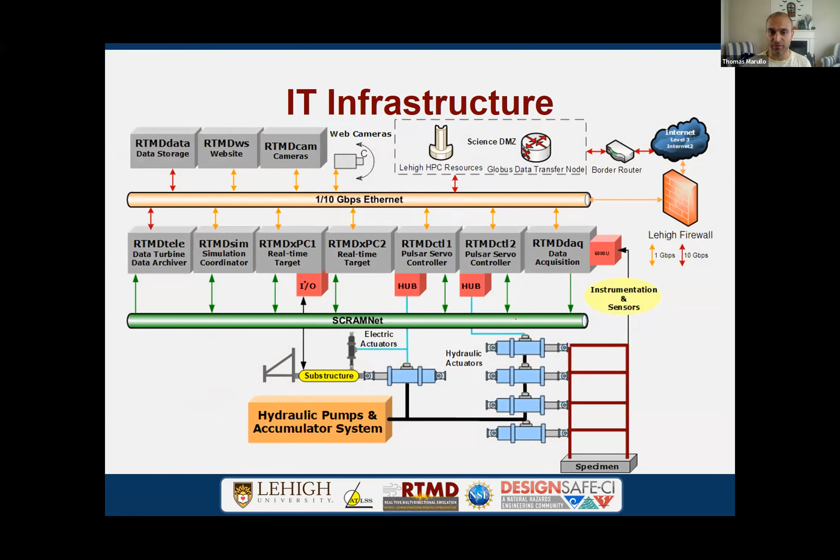As we move forward, we dissolve that into an IT infrastructure that we've developed here based on a protocol called SCRAMNet. SCRAMNet GT is a shared common random access memory network, a high-speed fiber optic based network for transmitting low-level data in an address space. If you think of Ethernet, you think of your local area network. This goes even deeper down the lower protocols, where it's high-speed fiber optic, instantaneous synchronization of data on a network through nodes. So data acquisition, control, simulation, they'll all see the same data at the exact same time within hundreds of nanoseconds.

This is very important for being able to have that real-time control and being able to synchronize to the millisecond of data coming from your data acquisition to your controller.

So again, we will zoom into what our data acquisition is. We briefly went through this. We use a Pacific Instruments 6000 USB-based data acquisition system. It has 3 chassis, each with up to 16 modules that can have approximately 8 different channels of data, ranging from voltage acquisition with excitation to strain, quarter bridge to full bridge circuits with thermocouples. So we can vary the amount of data acquisition you need for your experiment, with a wide array of different sensors and equipment, all scanning at the proper rate of 4 kilohertz for real-time testing. We scan at 2 times the control rate to prevent aliasing of those signals.

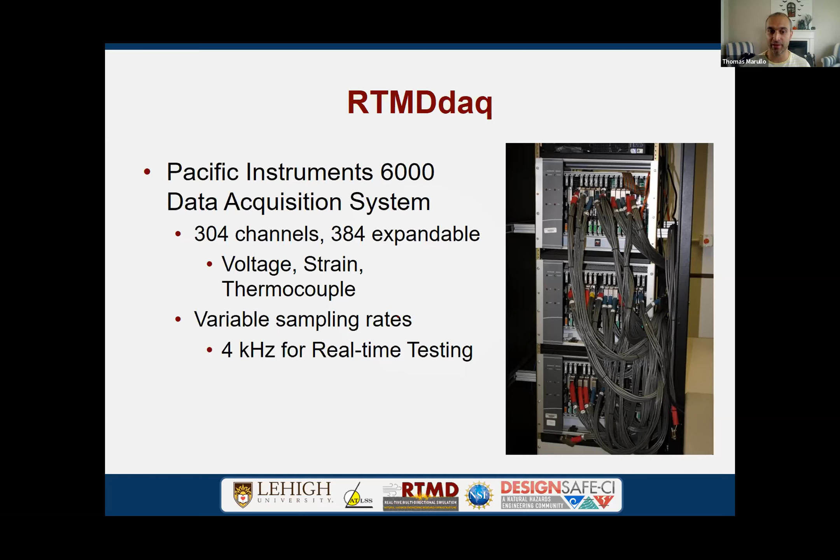Control system - we have multiple control systems. So RTMD CTRL, I'll take a step back. A lot of our things are prefaced with the RTMD preface defining what they are. So CTL1, CTL2, or CTRL just notes the types of controllers that we have.

Primarily we use the Servo Test Systems Pulsar Hub control system. It's a servo control system for hydraulics, mainly providing your PID control loops, and we run that at 2 kilohertz for more fidelity on our control rate.

We have recently implemented the Cyber Physical Small Structural Laboratory through another Pulsar hub system, and that gives us wider vendor support. So instead of using the traditional 5 NHERI actuators that we have that were provided from Servotest, we can now interface with the MTS actuator systems, MTS load cells, and other actuators as well if we need to. So this system is very useful for us.

And if you come in and want to do something more advanced, for instance with National Instruments sensors, you might have your own data acquisition system in a National Instruments system or Veristand. We have a Wineman INERTIA control system - they're a LabVIEW solutions provider, and they have their own PID controller that interfaces with National Instruments modules. So we can access both worlds of hardware and give you a lot of capabilities for control.

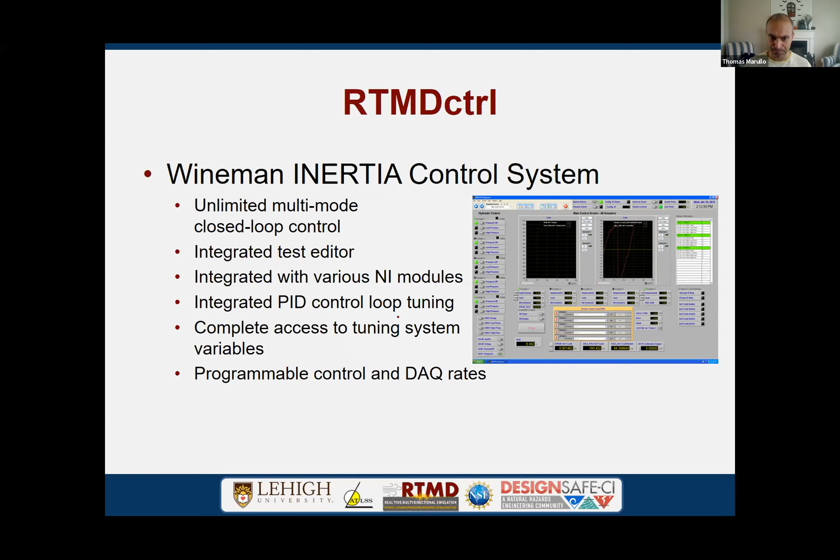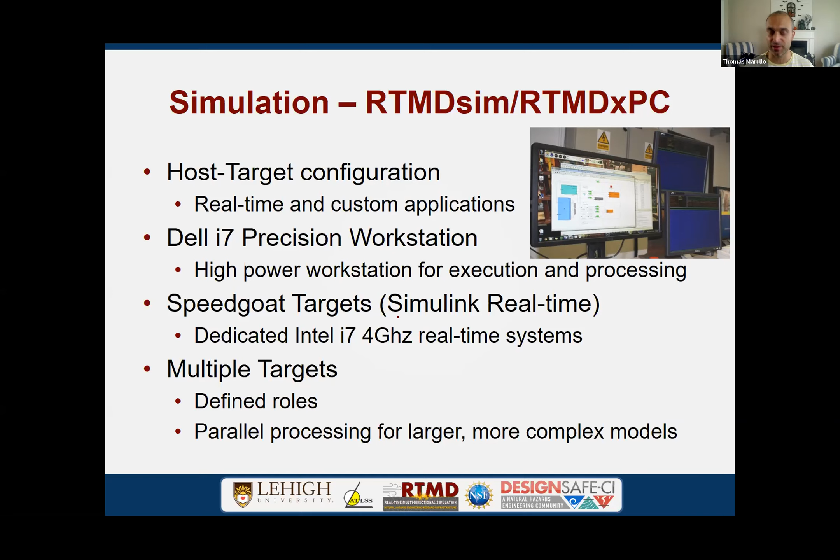So let's look at the simulation coordinator, which is the name that we tend to use in our data models. What is operating your experiment? There's a MATLAB Simulink interface that we primarily use that will control the rate of your experiment or control how we impose commands to targets or actuators.

And we're able to use that and remotely log into it for hydraulics-on, hydraulics-off testing, numerical simulation, and post-processing data that we can look at quickly after an experiment's done. We could dump data from our target systems and view it in a Simulink world or in another program that allows us to view plots you're seeing on the screen very quickly and analyze that.

And what we call RTMD XPC. XPC is the legacy name of a real-time workshop for MathWorks software, so we still use the name XPC for our targets. They are Speedgoat systems, and they provide parallel processing, fiber optic communication, and other types of industry protocols. If you need to use a different type of IP industrial protocol, we have the capability of interfacing with them as well.

Speedgoat provides modules for interfacing to different hardware, whether it's National Instruments hardware or their own types of analog to digital components. And it's a bring-your-own-model type of infrastructure.

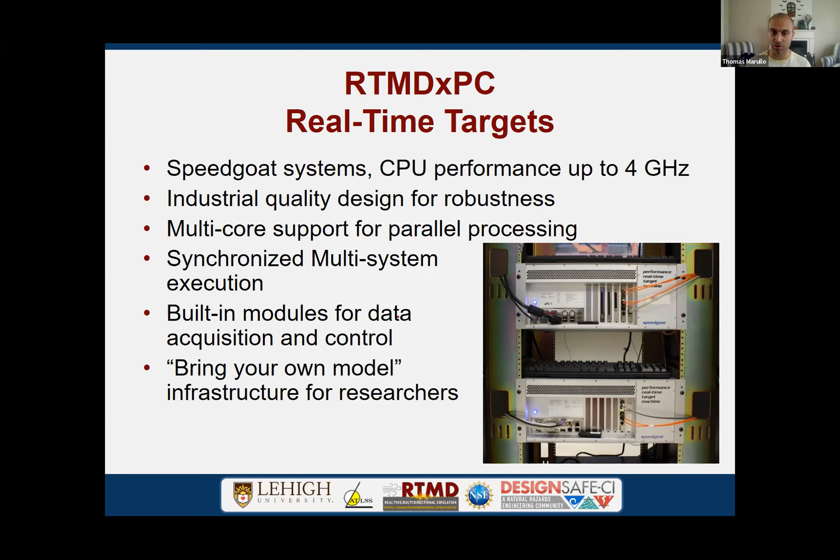For instance, I'm referencing them again because the most recent user, Scott Harvey, brought in his own model and just dumped it into our system as a validated block that we executed. I'll explain how we do that in a moment. But first, let's discuss from a technical point of view how model flow through real-time hybrid simulation works in our Simulink simulation.

So we discussed, Dr. Kolay and Dr. Ricles have discussed what the integration method is, the MKR integration method. And at a technical level, what are we doing?

At time zero, right when we start the experiment, there are calculations done for x and x dot, which are your displacement and velocity commands. At the beginning of that integration step, we need to look at the hybrid simulation. In our case, we might be running a viscous damper on the lab floor representing a tall 40-story building. So what do we have to do?

We need to separate the command coming out to that experimental component in its local coordinate system. But at the same time, we need to calculate the state of that 1600 degree-of-freedom model on our real-time systems. The problem is it's going to take a long time, meaning 6 milliseconds, to calculate that computational model.

Our actuators don't want a start-stop where they stop, you impose a step command, and then you wait for the next 6 milliseconds, because our systems are rate dependent. So what do we do? We separate the command from the computational model and let our actuator maintain its own inertia and linear ramping through actuator control, and at the same time we're computing that.

So we're doing a parallel process during the integration step, and then at the end of that 6 milliseconds, both systems—the experimental component receives its data back from the data acquisition, returning the force of the load cell and converting it back to a global system, along with getting the full response of the 1600 degree-of-freedom model. We form that back into a total restoring force vector that gets fed back into the integration algorithm and forms an acceleration for the next step.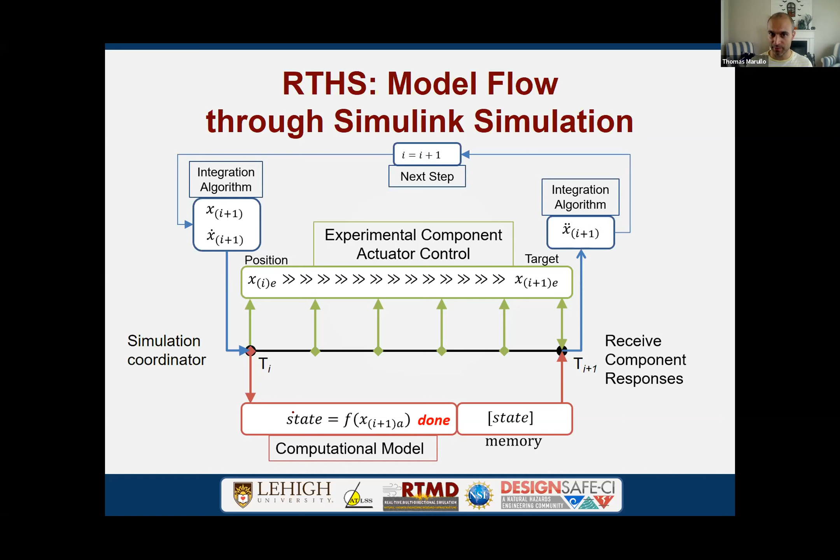Now your model knows what the next state of the system will be. We close the loop on that and repeat the whole process again. That's the flow of how integration substepping works in real-time hybrid simulation, and we've implemented that in Simulink.

This is a representation of what our Simulink models do for our hybrid FEM software, briefly discussed already: in the initial time synchronization, we calculate target displacements and velocities, and those get sent to both the numerical element calculation being done here, along with your experimental substructure. Like I mentioned before, bring your own code—this gray block can be replaced by your own validated block, which just accepts displacements and outputs restoring forces, whether numerical or experimental.

Remember, real-time hybrid simulation can have a number of numerical elements and a number of experimental ones, not just one. So we can drop in whatever you need here, and all of that gets returned while recording displacements, velocities, accelerations, and responses of the system for all degrees of freedom. All of this is implemented in our simulation.

As Dr. Ricles or Dr. Kolay even mentioned, if you have larger models that don't technically fit into the memory core of a real-time system, that's why we have multiple XPC systems. In our case, we could use ScramNet to synchronize those systems and provide a ground motion that sends commands across two or more XPCs where you're splitting your analytical substructure. So for instance, say we need to do an 80-story building.

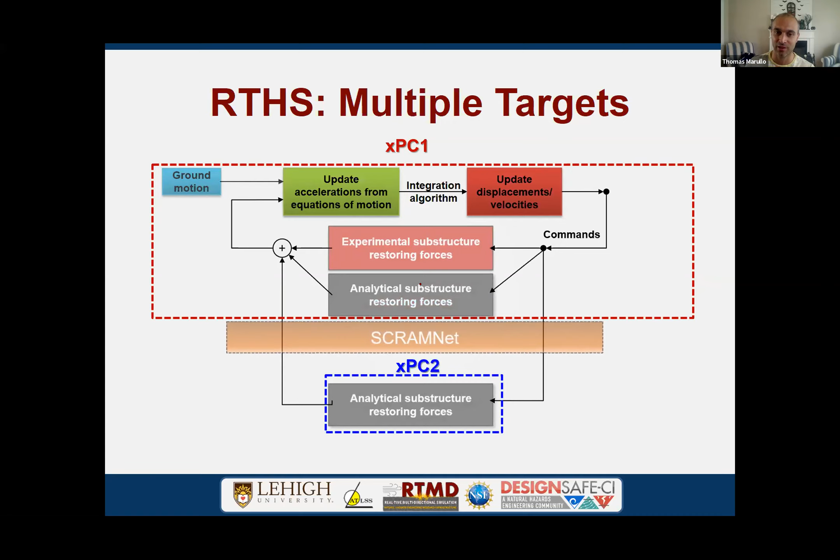Well, the first 40 stories fit inside one, the second 40 stories fit inside the other, and allows us to do that computation over time. So we can expand our capabilities and have larger scalability in our experiments.

Again, I talked about safety limits. Safety is very, very important. When Dr. Harvey was doing his base isolation systems, we built in safety limits so that in case we went past a certain displacement limit, the test stopped. He had complete confidence and success in pushing the limits of his experiment, knowing that if we did hit a limit, our safety features would catch that and provide no problems for the experiment, and then return everything back to its resting position. So we have layers and layers of safety simulation built in, whether it's software or physical limits on the specimen, like hard stops that you would see in actuators.

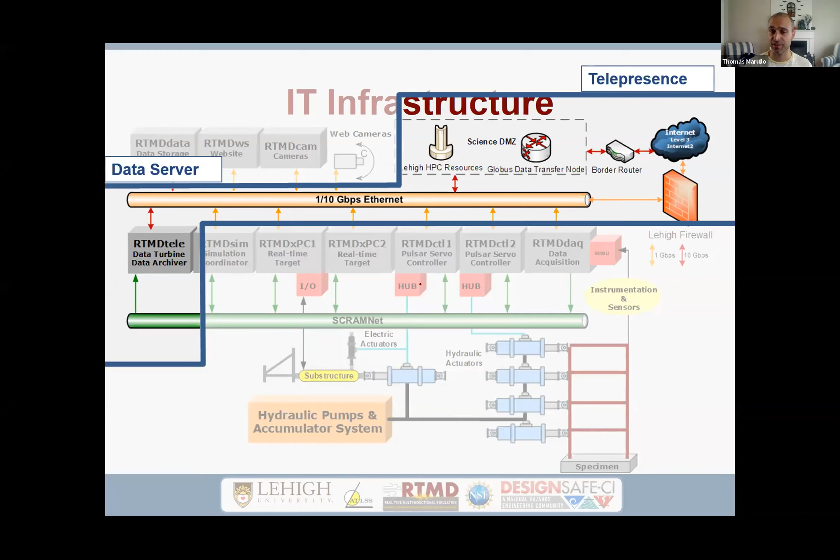Let's talk about the telepresence system. We have a number of systems here that allow you to visualize your experiment locally and remotely, whether it's in our facility or through Lehigh, the infrastructure that they provide. For data streaming, we use the open source data turbine ring buffered network bus, RBNB.

It's technology that was brought into the NEES phase that we continue to develop on and use. What that does is it takes data off of the ScramNet and puts it in a ring buffer, so that you can store that data on a network and then view it remotely with a viewer that will be able to move into that data based on a time step.

So you could view data using the real-time data viewer, which is a Java application that can be run on any system. And again, this is legacy software that we've continued to maintain and provide support for at the Lehigh facility, and this will allow you to view data in a real-time sense.

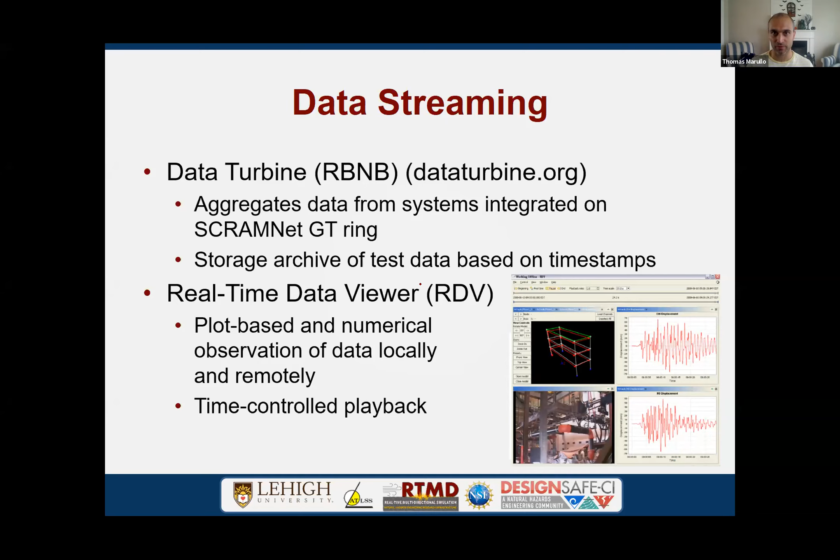Or you could go back minutes before and say, what happened, I want to see what that data is. While you're running an experiment, you can't just say, all right, pause the experiment, let's go look at the data. No, we continue to run our experiment and then backtrack a little bit in the data viewer and see what happened at that point in the experiment. So very good tools that we have available, locally and remotely, for users.

Photo and video capabilities. We've procured 24 high definition, right now these are 8K Amcrest bullet cameras, or PTZ, pan-tilt-zoom cameras, that we could put as instrumentation into your setup. So you could put these at different points into your system and be able to record video and visualize your system using our capabilities in our control room.

Now, the reason why we have that is because when you come to our facility, you're in our control room and you can't see your specimen. The reason is safety. We need to be in our control room, but then what's the problem, you can't see it. So we have 24 cameras up with large screens that you could zoom into parts of the experiment that you wouldn't be able to just see with the naked eye while you're out there. So it's very important to have a lot of visual technology in our room.

And then we have various other cameras for recording video as well, and Lehigh does provide cameras if we need to rent out. We're using Blue Iris as our backend for doing camera recording and streaming. It's a robust system for allowing us to record video and audio, and to store them synchronized into a buffer, and then later on stream them if we need to. People could come onto those web services and be able to see archived experiments as well.

Let's talk about data, and then we're going to start to wrap up this conversation on data management. We have a Synology-based system that stores all of our data that we collect at Lehigh. This is connected to our local area network. Currently, we have about 50 terabytes of data. Each one of those bays has 8 terabyte hard drives set up in dual disk redundancy, so that if one or two of those drives fail, your data is safe, and we could quickly replace them. I keep on hand another 8 hard drives to mirror those other drives, just in case the data goes down, I go in and quickly replace that.

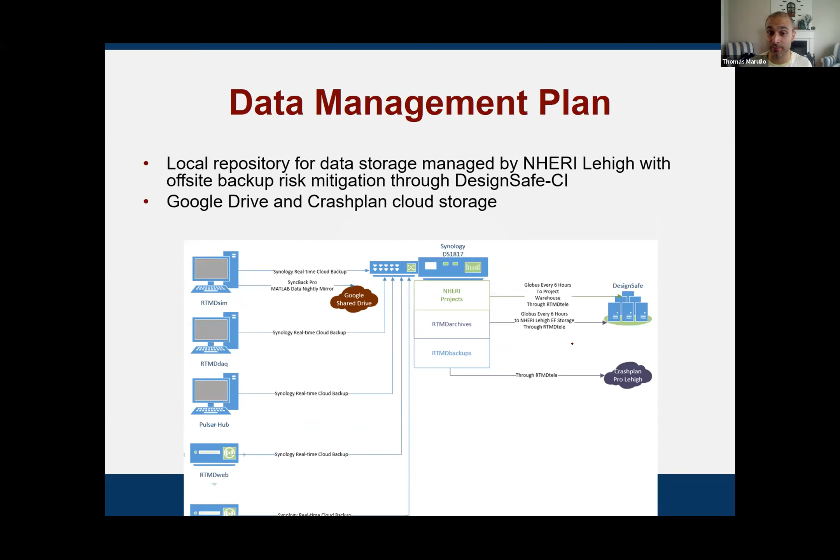So we adhere to retention policies that Lehigh provides, and the NSF data management for keeping that data online. Eventually we want to get rid of it because we're not going to need that data. So after 10 years, we can either give it to you or leave it at DesignSafe, but it won't have to exist on our systems longer than 10 years unless required.

Under the NHERI Lehigh data management umbrella, what are we archiving for data? Well, during the experiment, we're going to be archiving that raw or unprocessed data that comes from the real-time systems or the data acquisition systems.

We keep that. The reason why is, what happens if you have a calibration factor mistake? We can always go back and recalibrate that. You don't want to just take the processed data and then not have the ability to go back.

So then we take that along with the converted and derived data sets that you might have gotten from the experiment or post-processing. Again, I find that the largest volume of data, size-wise, is going to be your video of the experiment. High-definition video takes up a lot of space.

So we store that along with computational models, whether they're in ANSYS, OpenSees, Hybrid FEM, whatnot—whatever you pick. We're going to archive that and whatever scripts you have for doing it.

And then we try to maintain the same folder structure, appending the test name and date so that it's easy to search for what test you're looking for and what date it was performed, with a data description. We try to adhere to what the DesignSafe data depot model is, which we've helped implement through the Lehigh data model.

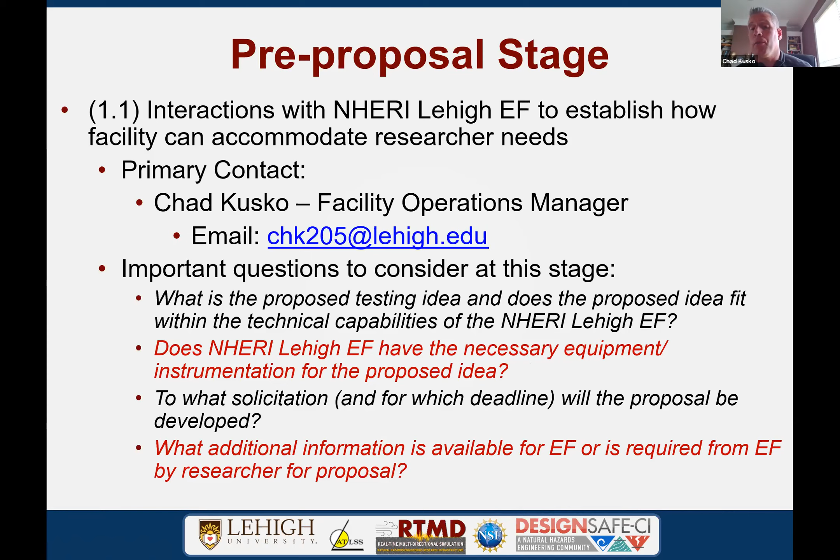And then what additional information can we provide you, either directly or through our website, that will help you address your questions? On the website, the cover interface page had six or seven blocks, including the data management plan we clicked on, but two of the other blocks are questions for a pre-proposal stage, and also a checklist for proposal preparation.

Those were created to help you very early in this process as you're considering NHERI Lehigh. It's a one-stop point of questions you can ask yourself, or that we would ask you, to make sure you're addressing things as you consider whether NHERI Lehigh is the right facility. I encourage you to look at those in advance, as it may help you formulate thoughts or generate additional questions to bring to our attention.

So if we conclude with the pre-proposal stage, we move on to the proposal writing stage. The first thing I always encourage, especially for an NSF proposal, is to review the latest version of the NSF proposal and award policies and procedures guide, specifically chapter 2, proposal preparation instructions. Then I encourage people to review our NHERI Lehigh facility user guide.

That's another box on that interface slide that Tommy had shown from the website. It contains a plethora of information regarding our site, and is really a one-stop shop to help you get information as you consider our site.

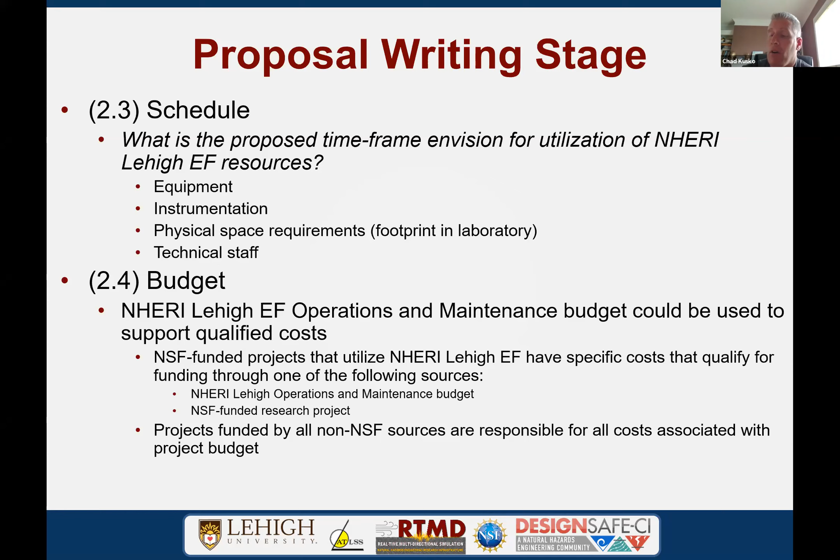Budgetarily, we have O&M budget that can help support certain aspects that qualify. What qualifies as O&M funded versus project funded is also listed on our website. But if it's a non-NSF project, we'd still be happy to run it in our laboratory if we could technically do it. You as the project itself would bear more cost than something funded by NSF.

Where our operations and maintenance budget would help alleviate or subsidize some of those costs. So if you go to our website, there's more information on budgeting, including files, NHERI Lehigh rate schedules, both for non-NSF funded and NSF funded projects. Make sure you're clicking on the proper funding source, depending on who you're envisioning your funding provided from. This will give you an idea of use fee rates to use NHERI Lehigh equipment, instrumentation, and other equipment, and also personnel rates to have staff support these costs that aren't covered by O&M.

One other thing to consider as the budget, researchers that approach us have varying interests on whether or not they want Lehigh or Lehigh faculty or expertise on the budget, or as part of the proposal. Generally, it really doesn't matter to us, it's really up to the researchers. We're encouraged by NSF to have projects from outside researchers that do not have Lehigh faculty on, and we're certainly comfortable with that, especially if we've seen early in the proposal process what the concept is, so we know it could be done within our facility, and we're there to provide the support.

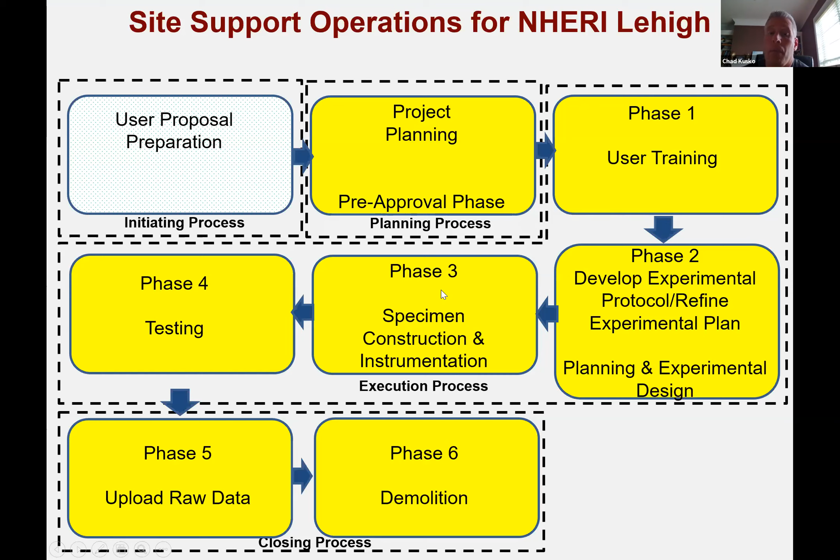Beyond the proposal stage, we also have the project execution stage. Once funding comes in, all these other phases from project planning through phase 6 are post-funding support steps. There are a couple things required, driven by the NHERI NCO for each equipment site. Regardless of the site, it's generally the same forms and information. They could get modified over time, but generally include the same information over the entire operation of our NHERI facilities.

There's a compliance check, which is a high level check very early in the process, covering experimental feasibility, safety, budget, schedule, data - a lot of things. Hopefully we talked about this in the pre-proposal stage, and then we can just refine them a little bit at this point since we're farther down the process.

There's also a site utilization request form, which is an agreement between the NHERI NCO, the researcher, and us as an equipment site, saying we agree on the key aspects of the project. Many of those aspects are the same ones from the compliance check, but in as much detail as possible, so we know what the researcher wants, the researcher knows what we can provide, and NHERI as operational oversight on NSF's behalf agrees the program is set up for success.

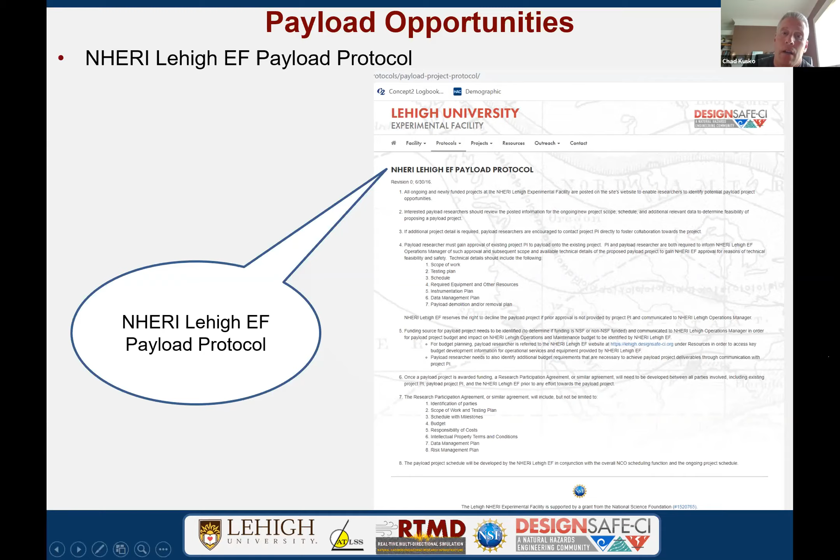That's going to conclude my presentation on site support operations. I'll stop sharing at this time and then open it up for any questions you may have on that section.

Chad, before the questions, this is Jim again. Can you elaborate a little bit on those rates? You mentioned Lehigh PI or co-PI participation. We've got to be sure it's clear that Lehigh faculty don't need to be part of the research team, right? NSF, in fact, has asked us to make sure that's clear to the audience. Is there a distinction? Can you clarify the rates?

Sure, absolutely. Lehigh's sponsored organized research rate, the standard indirect cost rate, is currently 61%. That would be applied only to the project portion of the budget we would develop for you to utilize to do the testing at the NHERI Lehigh site. So if you have a Lehigh faculty member as a co-PI on your project, the indirect cost rate applied would be 61%. As a service center, where we do not have a Lehigh faculty member as PI and we're just providing operational support—you're utilizing our site, no faculty involved in the proposal, but we're helping you conduct the research and utilize the facility—it's closer to 41%. So it's about a 20% differential in the rate.